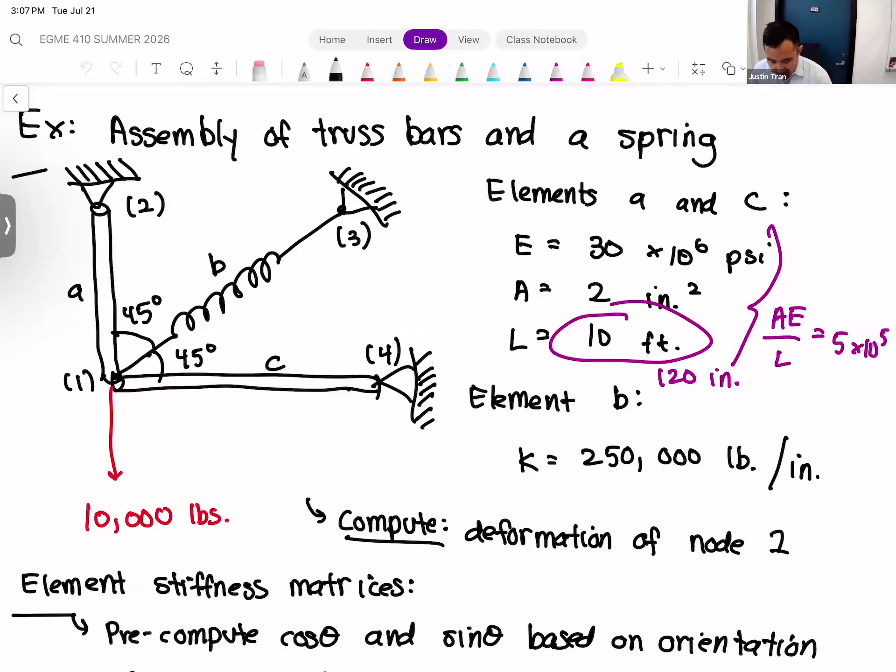So the example that we're working on was this one here. It's a 3-element system. We have 2 truss bars, elements A and C, and a spring, element B. And they're oriented based on the figure that is here.

Where we left off last time was the computation of the element stiffness matrices. Even though doing 2D problems requires more work because there's just larger matrices to compute and more things to plug in, the overall process we follow to do a direct stiffness problem is still the same. We start with the element stiffness matrices, then move on to assembly of the elements into one global linear system, apply the boundary conditions, and then solve from there.

So let's go ahead and pick up where we left off. In fact, we kind of left off at a good spot because we had just finished computing the element stiffness matrices for elements A and B. So let's refresh our memory and compute the element stiffness matrix for element C.

For the element stiffness matrix for a 2D truss, remember it is a 4x4 matrix, and it's given by the following expression. We're going to be computing lots of sines and cosines of the angle on which the element is oriented.

I have it written up here. Let me just write this down. So that's our element stiffness matrix for a truss bar.

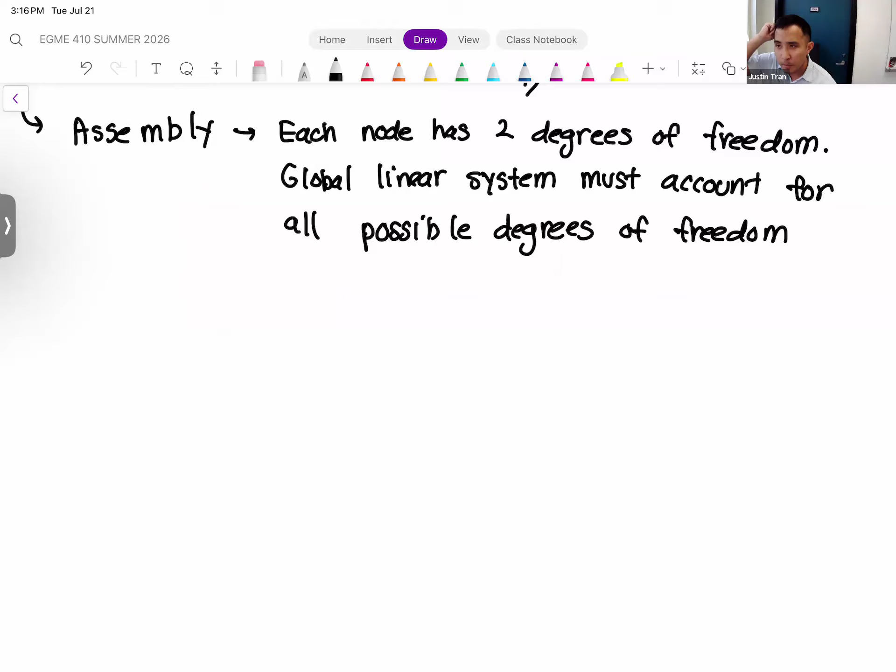Okay, so in this case, for a 2D truss problem with 4 nodes, each node having 2 degrees of freedom, that means our global linear system will have 4 times 2, which is 8 degrees of freedom. So that's 8 rows and 8 columns. Okay, and so you want to make sure you give yourself enough room on the paper to write this. Now, granted, a lot of this global linear system is going to be 0, so don't be intimidated by a large linear system, but we do have to at least have a space for them.

Okay, so let's make a very large matrix here. I'm going to give myself as much room as possible. Okay, and then first let's label the columns just to make sure we have everything. So for every node, I'm going to label a column for the x deformation and the y deformation. Okay. All right, so we have d1x, d1y, d2x, d2y, d3x, d3y, d4x, d4y.

Okay, and then we have to write all of those degrees of freedom into the rows too. Okay, so you have a d1x row, d1y, d2x, d2y, d3x, d3y, d4x, d4y.

Okay, and then one thing we haven't written here yet is the forcing vector, so that's f1x, f1y, f2x, f2y, so on and so forth. But we'll write that after—it's just kind of taking all the room here just to write the matrix.

Right, okay, so just like we did before, we are going to go through each of the elements and write in the entries, or insert the entries of its element stiffness matrix. Okay, so let's start with element A. Element A is connected to nodes 1 and 2.

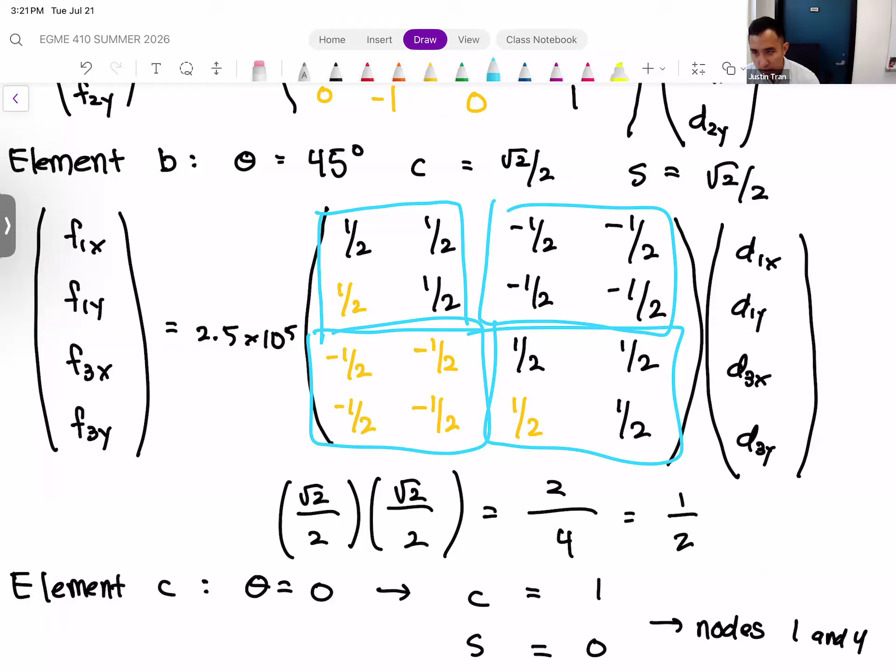So for the upper left quadrant, that goes into the D1X, D1Y entries, and so that's all positive 1/2.

Oh, I'm sorry, before you start writing those in, I always forget this. Remember, we're not just writing in the entries in the middle there, we also have to account for the multiplier in front.

So we can do this in a couple ways. If we want to keep the multiplier in front equal to 5 times 10 to the 5th, we can do that. So basically we're going to say that there is a multiplier in front, going to say in front here is 5 times 10 to the 5th. That way we don't have to rewrite the entries for element A.

But it is going to affect how we write the entries for element B, because element B, if you look at the entry in front, remember element B was associated with the spring. So the spring constant for the spring is different than the value for AE over L for the truss bars. Instead of being 5 times 10 to the 5th, for the spring element B, it's 2.5 times 10 to the 5th, which is 1/2 of that.

And so when we add those entries into the global stiffness matrix, then we have to account for that. Instead of adding 1/2, we're going to add in 0.25, which is 1/4. Okay, so 1/2 divided by 2.

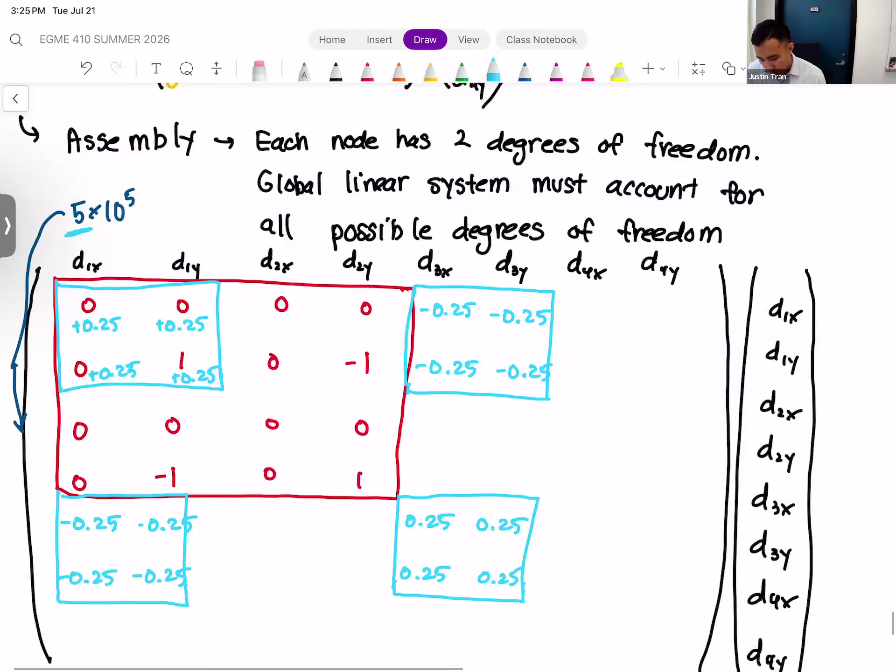Now, the challenge with element B was that the multiplier in front, essentially the spring constant for that spring, was half of the effective spring constant for the truss bars. When we computed AE over L for the truss bars, we got 5 times 10 to the 5th, which was the value we put in front of our global stiffness matrix. But the spring had a spring constant that was only half of that, which is 2.5 times 10 to the 5th, or 250,000 pounds per inch.

So the fact that these are different, one way we can make them the same is we factor out a 2. We factor out a 2 from the interior of the matrix and multiply that by the front, and that gives us 5 times 10 to the 5th. But then that also changes everything in here. If we factor out 2, that means we have to divide everything within the matrix by 2. So instead of 1/2, we have 1/4.

Okay, so hopefully that makes it a bit more clear, because I know I kind of messed that up a little bit. In the notes, what I had in front was just a regular 10 to the 5th, so I basically eliminated that out, and then went from there.

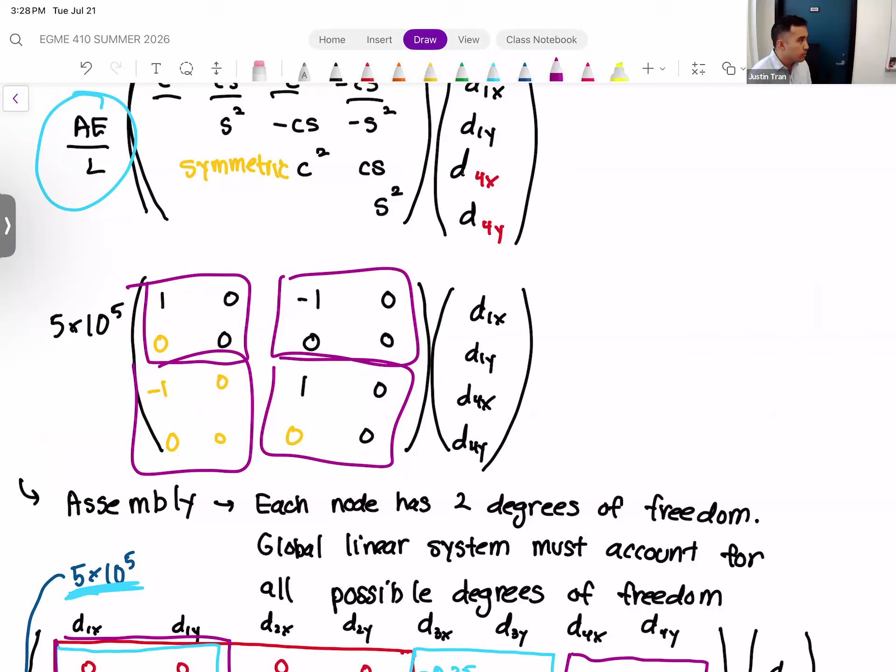Okay, so let's go ahead and add in those entries. Just like before, we're going to take our element stiffness matrix, block them off into 2x2 sections, and then scatter them to the different parts of the global stiffness matrix according to what they are.

All right, so we start with the upper left portion here. We have a +1, and then a +0, +0, +0. Next we have the next portion, which is a -1, 0, 0, 0. And then the bottom left, we have a -1, 0, 0, 0. And then a +1, 0, 0, 0.

And then just like before, everywhere that we haven't boxed yet, we're just going to fill in a 0 into those locations. Okay, just like that, and with that, our assembly is done.

Well, technically, we could simplify this. If we look at the upper left portion there, it's a little bit of a mess because we have a bunch of things added. So let's simplify this just to make it a little bit easier for us.

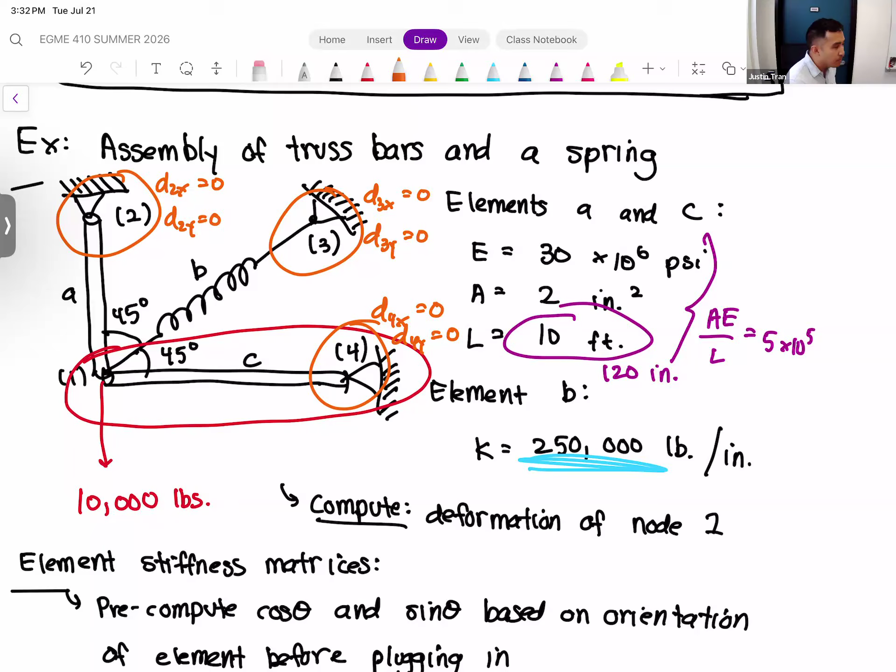So that's quite a lot, right? Basically every row that's associated with nodes 2, 3, and 4, we're essentially going to replace them. And since each of these nodes have 2 degrees of freedom, that means we're going to apply this boundary condition to 6 rows in our global matrix, which is a lot.

Okay, so let's return to our global matrix. We're going to be affecting the rows of d2x, which is this one, d2y, d3x, d3y, d4x, d4y. So all 6 of those rows we're essentially going to replace. Let me clear those out so we can see this a bit better.

Okay, so let's start with the d2x row. Most of it's already in place, right? So we start by replacing the entire row with zeros, which it kind of is already, and then we put a 1 on the diagonal. For d2x, which is the third row in our matrix, that means the 1 is going to go in the third column, the d2x column. Then on the right-hand side, we set f2x equal to 0.

Next we're going to apply that constraint to d2y. We're going to zero out the entire fourth row. This one and this one are going to be zeros, but we need to put a 1 on the diagonal entry, which is going to be the fourth column, right here. And then just like before, we take f2y and set that equal to 0.

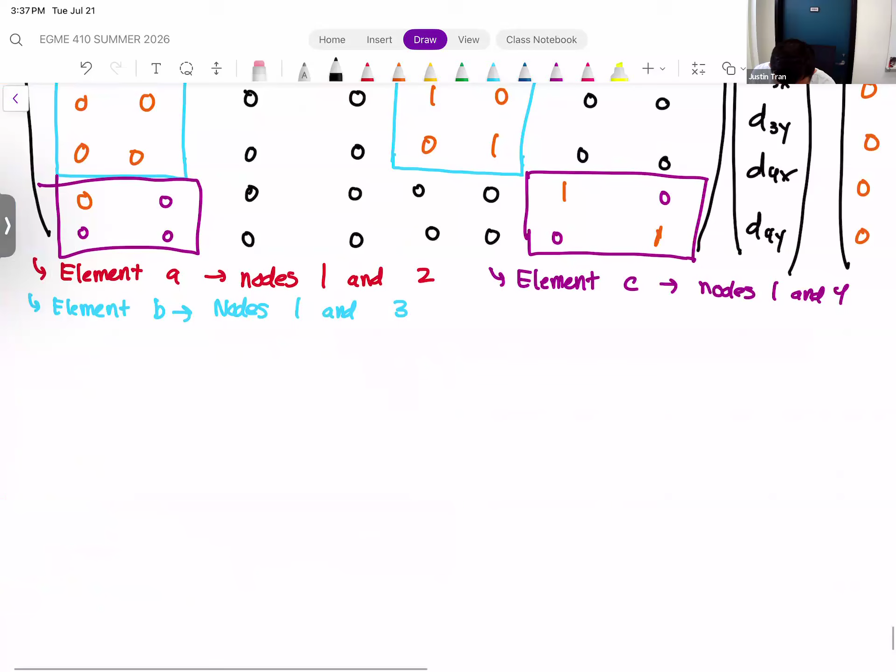Okay, let's go ahead and plug this matrix into MATLAB. And if we do that, what we get is d1x is equal to 0.0033 inches.

d1y is equal to minus 0.0167 inches.

So you can see here that most of the deformation is in the y direction, but because of how the truss structure is designed, there is actually some deformation in the x, even though our load is purely in the y direction, which is very interesting. All the other deformations, d2x, d2y, all the way through to d4y, are all zeros, because of the constraints.

So the only answer here that's kind of remotely interesting is for node 1, because that's the only one that's not constrained.

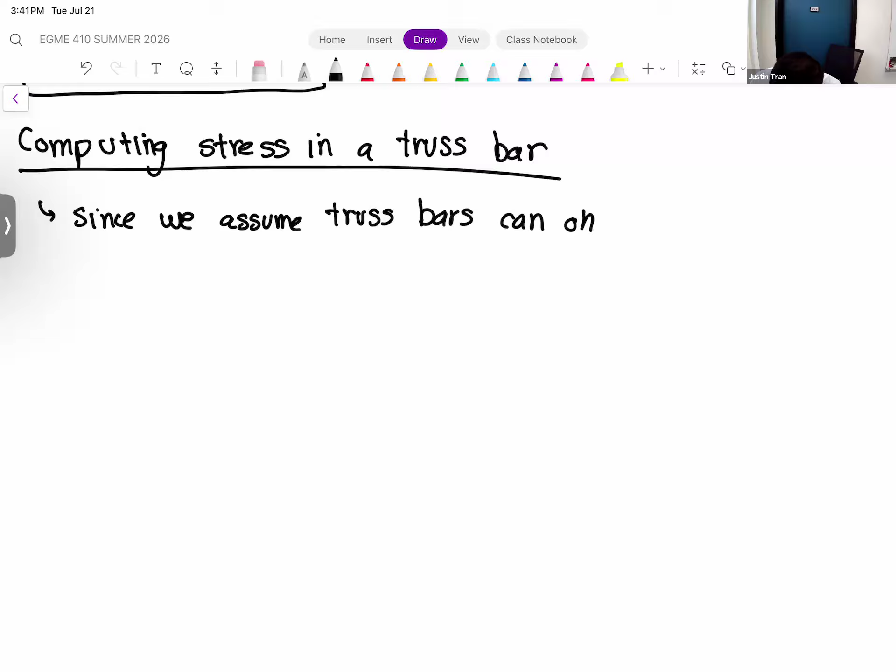So since truss bars can only support tension and compression, that means the mechanical stress that the truss bar experiences is going to be purely normal stress, and there's going to be no shear whatsoever. Because of that, we can compute the stresses straight from the deformation solution.

All right, so basically, in the interest of time, because I want to make sure we do the next example before the break, I'm just going to give you the formula here. But basically, the way that we derive this formula is that we take the nodal forces in the local coordinates, the coordinates that are local to the element, hence the reason why it's a purely normal stress, and we just divide it by the area.

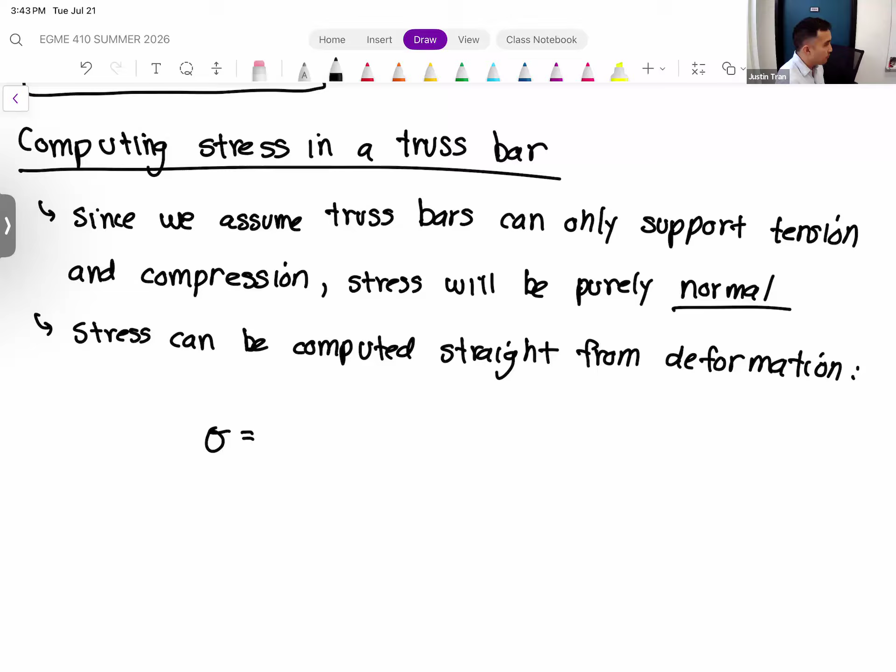So the stress in a truss bar, which again is only computed after you compute the deformation—it's just like in ANSYS, right? In ANSYS, first thing we always compute is the deformation. Then from there, ANSYS computes everything else. So same thing here.

So for a truss bar, we have E, the Young's modulus, divided by L, which is the length, multiplied by this vector. The vector is going to be minus cosine, minus sine, cosine, sine.

So you do need to know the orientation of the element itself. And then you're going to multiply that by a vector of the deformations of that element: d1x, d1y, d2x, d2y. I'm using node 1 and 2 here just as a placeholder, but just know that that vector is the vector of deformations for that element. It doesn't necessarily have to be nodes 1 and 2.

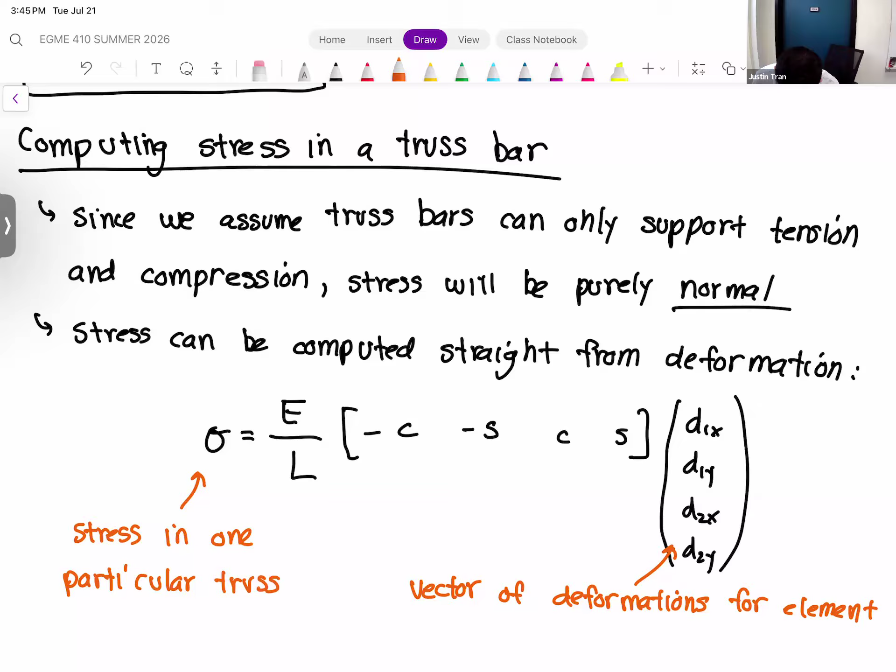And so this sigma here is a stress that you can compute per element. So essentially, you would repeat this calculation for every element or every truss bar that you're interested in finding the stress for.

Okay, so let me demonstrate how to do this just very quickly from the last example.

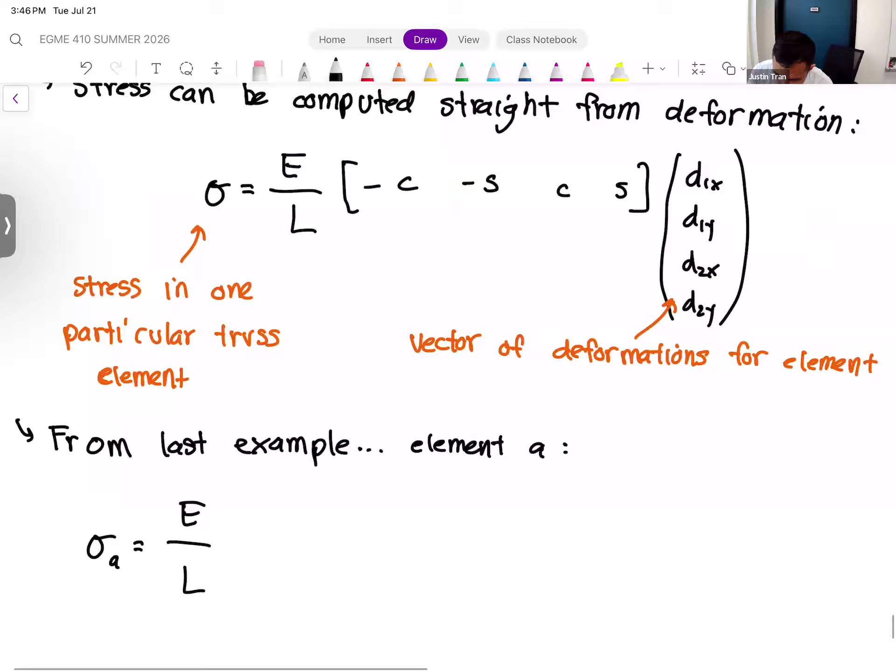So if we plug in the values here, which we've already found from the problem: d1x is 0.0033 inches, d1y is minus 0.0167 inches. And d2x, d2y, since node 2 is fixed, are both zero.

So if we compute this out, we basically do the vector-vector multiplication. Since we're doing a row vector multiplied by a column vector, we have essentially a dot product between these two vectors. The stress in element A is 4,175 PSI, pounds per square inch. One nice thing about this stress calculation, just like in ANSYS, is we can interpret the sign of the stress as either being in tension or compression. The fact that this stress is positive means element A is in tension.

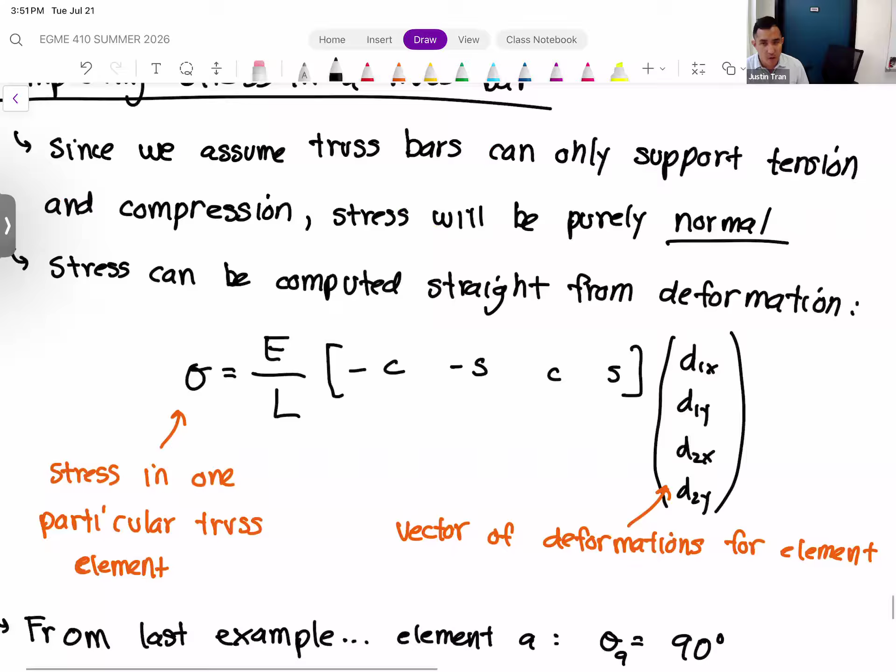Any questions on this before we move on? Okay, so I have one more example for 2D trusses, and this one introduces a new type of constraint. Let's introduce that first, it's pretty straightforward before we do the example. It's probably a constraint you've seen before in your previous classes, hopefully in statics — the concept of a roller constraint.

So with the previous example we did in 2D trusses, we've been introduced to the fact that any given node can have multiple degrees of freedom. What we implicitly assumed in the previous problem was that every fixed support on a 2D truss zeros out both degrees of freedom. We can see that here: nodes 2, 3, and 4, both their x deformation and y deformation are zeroed out. So there are constraints that only constrain one out of two of the degrees of freedom, or maybe one out of more.

So it's possible to have constraints that restrict only one degree of freedom. In fact, we'll take this idea further in the second half of class today when we talk about beams, which introduce another type of degree of freedom called a rotational degree of freedom, which we've already talked about in activity 4. There are different constraints that can constrain maybe only one or two of these degrees of freedom. The first one we're going to introduce is a roller. A roller support looks kind of like a very simplified roller skate. For a roller support, we make the assumption that only the direction perpendicular to the surface is going to be constrained.

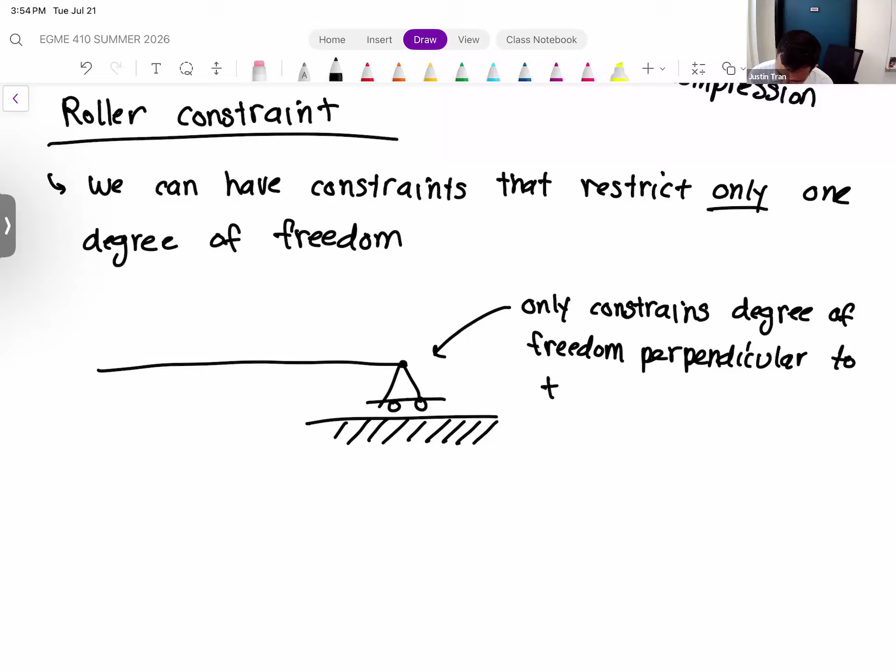So in the direction that's parallel to the roller surface, we leave that alone. So for this figure here, we can see that the dx deformation is going to be free.

Right, because that roller is in the x direction, so our structure is free to roll in that direction. Meanwhile, dy is going to be 0, just constrained. Now, technically, if you put a roller on a surface, it only constrains deformation in one direction. So if you have a roller like this, technically it's only going to stop deformation in the negative y direction. But for the sake of simplicity, we're going to assume that all y deformation is restricted, even in directions that are kind of opposite from the surface.

The way I usually illustrate it is, don't imagine this as just purely a roller. Imagine the roller is inside a track, just like that. So the wheels are free to roll in the x direction, but any movement or attempted movement in the y direction, the constraint is going to prevent. That gives us a little bit of flexibility in terms of how we do our problems. So sometimes a roller support is more appropriate for a given situation.

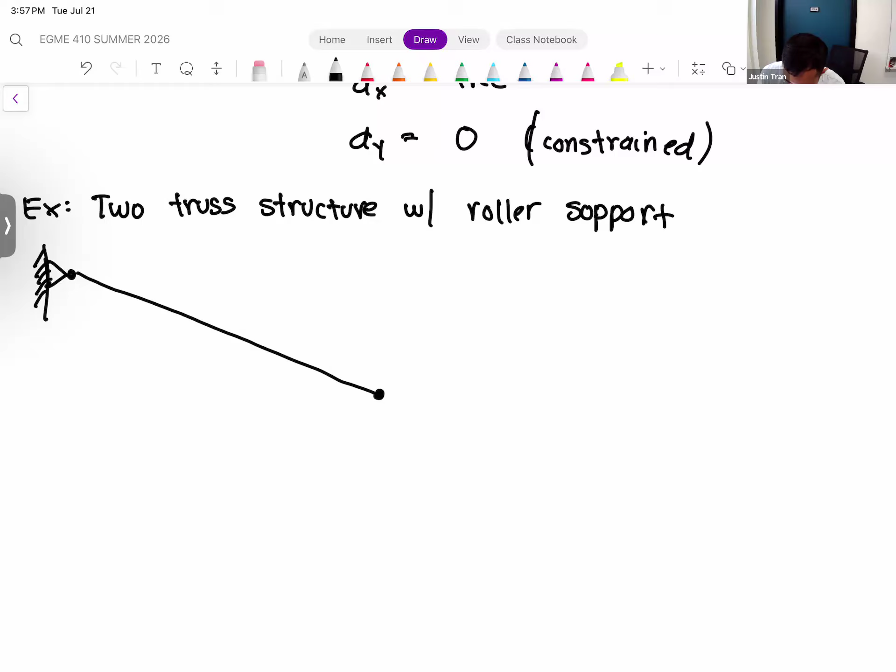So let's have a two truss structure with a roller support. It's going to be a structure that is attached to a wall. We're going to have one element here that is slanted downwards, we'll call this element A. And another element here that's purely horizontal, we'll call this element B. Element B is going to be connected to a roller.

So let's go ahead and label the nodes. We're going to call node 1 here at the end. The other node that's connected to element A is going to be node 2. And then the roller support is going to be at node 3.

We have some dimensions here as well. We're going to assume that the length of element B is 5 feet, and the length of element A is 10 feet.

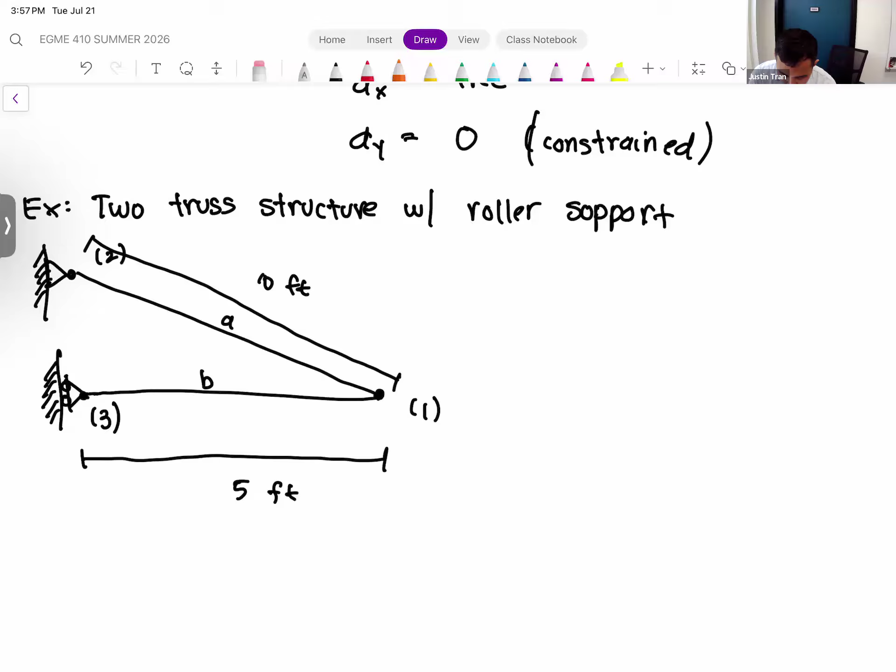In terms of load, we have a single load here, kind of flying off or holding on the end. So it's a load in the negative y direction on node 1, with a magnitude of 25,000 pounds.

Let's also talk about the truss properties. Both of them are made of the same material, so both have a Young's modulus of 30 times 10 to the 6 psi. And we're going to assume that both have the same cross-sectional area, which is 1 inch squared.

So for this system here, we're going to do basically our standard calculation. We're interested in computing the deformations of all nodes in the system.

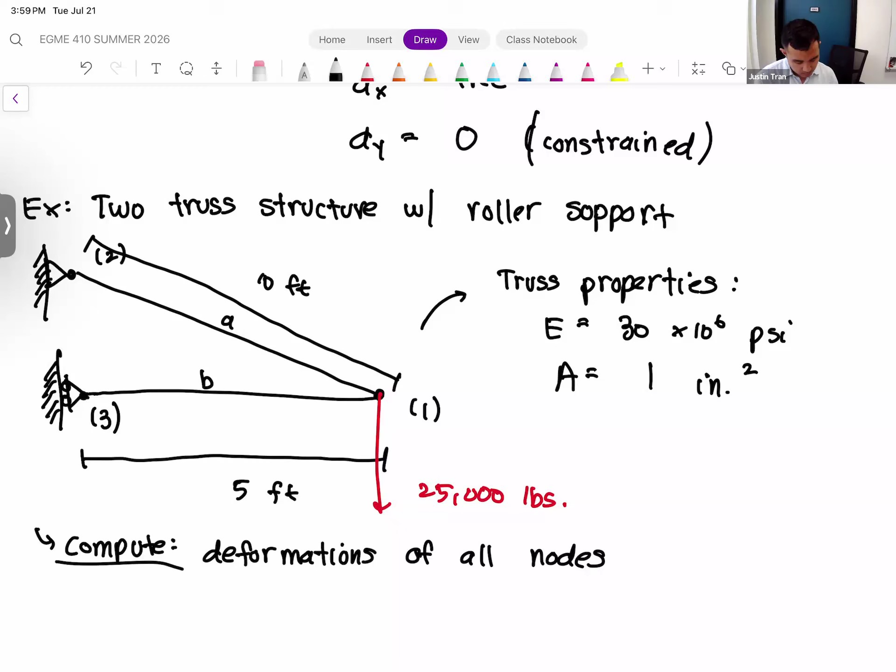All right, so we have a pretty standard problem here. The only wrinkle here is that we have a roller support at node 3, so that's going to affect how we apply the boundary conditions near the end. But it starts in a very standard way, so let's go ahead and start with the element stiffness matrix.

Oh, I'm sorry, I forgot one piece of information on the problem. We need to know the orientation of element A. We can tell from the image that element B is horizontal, but to get the orientation for element A, we need that angle there. We're going to assume that angle is 30 degrees. This is our first time with what I'd consider a fairly awkward angle. Anything that's not 0, 90, or 45 degrees is a little bit awkward, so our sines and cosines, our matrix here, is going to be a bit strange. Just be prepared for that.

Okay, so let's start with the element stiffness matrices.

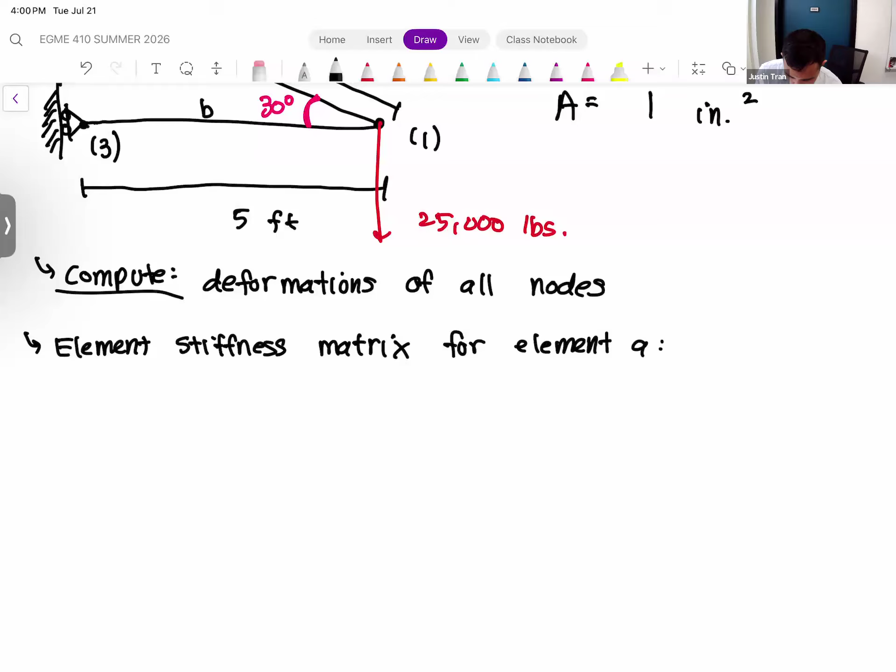Okay, so let's start with element A. So we know it's going to be, we do have a weird angle here of 30 degrees. So the first thing we need to determine is what its orientation angle is, because that's going to affect how we compute the sines and cosines.

So from the image, it's very tempting to set the orientation angle for A to be 30 degrees, because that's the angle that's given to us. But that's actually not the angle that you should plug in to sine and cosine. Let me explain why.

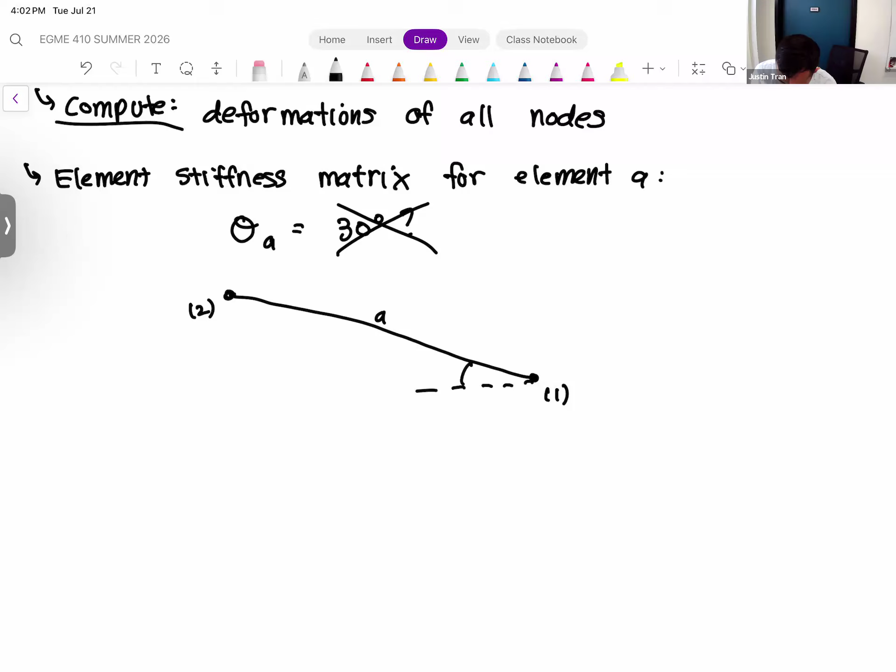If you look at how element A is oriented, let me go ahead and draw it here by itself. So this here is element A. We have node 1 here on the left, node 2 here, or node 1 on the right, node 2 on the left. And this angle here is 30 degrees. So the acute angle that element A makes with the horizontal is 30 degrees.

But what I'm saying here, or what I'm claiming, is that that's not the angle that you should plug in to your Truss element stiffness matrix equation, right? And why is that? That's the only angle that's given here, right? Well...

What I didn't mention last time, just because it wasn't an issue with the past example, is that there is a certain convention that we need to follow when computing these orientation angles. In some sense, it doesn't matter what convention you use. The only thing that matters is that it's consistent. So I'm going to give you my convention, just so your answers are consistent with mine. But if you prefer to do this slightly differently, that's fine. You're still going to get the same answers in the end, granted that you use the same convention for every single element.

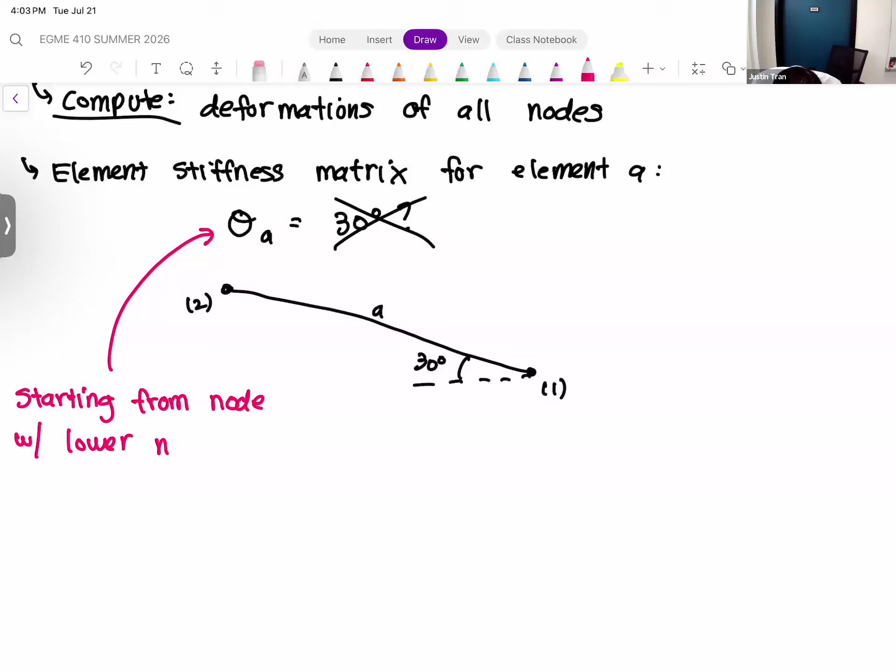Here's the convention I use: I start from the node on the element that has the lower node number. So you're going to look at your element, right? It's going to be connected to two nodes. You're going to look at the one that has the lower node number index, which in this case is node 1. So this node, you can imagine that as your pivot.

All right, so that's the pivot. That's where you're rotating around. Now, what you need to imagine is that the element with that as the pivot is oriented at 3 o'clock, so it's going to be pointing in the positive x direction.

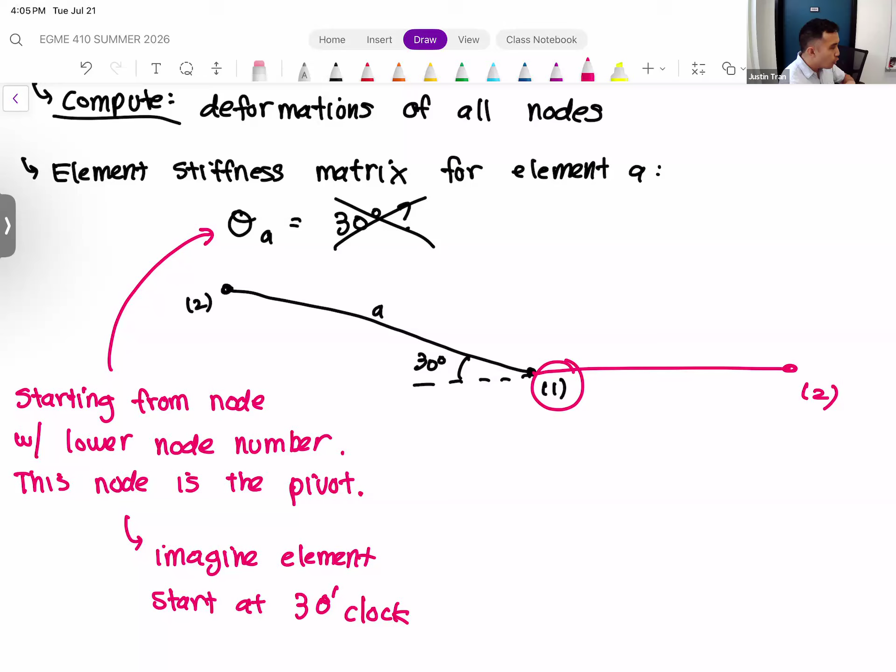And so essentially, we're going to imagine that our element starts like this. Using the lower number node as a pivot, imagine that our hand or our element kind of pushes out in the positive x direction. Right, so that's where we start. Now, that's not the orientation of the element itself, but in order to get the element into its orientation, we're going to rotate counterclockwise until we reach the orientation of the element that's given to us in the figure.

So from that starting position of 3 o'clock, we're going to go essentially backwards in time, you can think of it like that, until we reach the orientation that's given to us. So essentially, we're going to start here and then rotate along that pink arc just like that. All right, so the amount that we rotate counterclockwise, that's the orientation angle that we plug in.

So you're going to have to use a little bit of trig here, a little bit of geometry in order to get this answer. But you can see from this image here where if the given angle is 30 degrees, and that's with respect to a horizontal axis in the negative x direction, that means our orientation angle, in order to get from 3 o'clock to our given orientation, has to be 150 degrees. And so that is the angle that we plug into our element stiffness matrix.

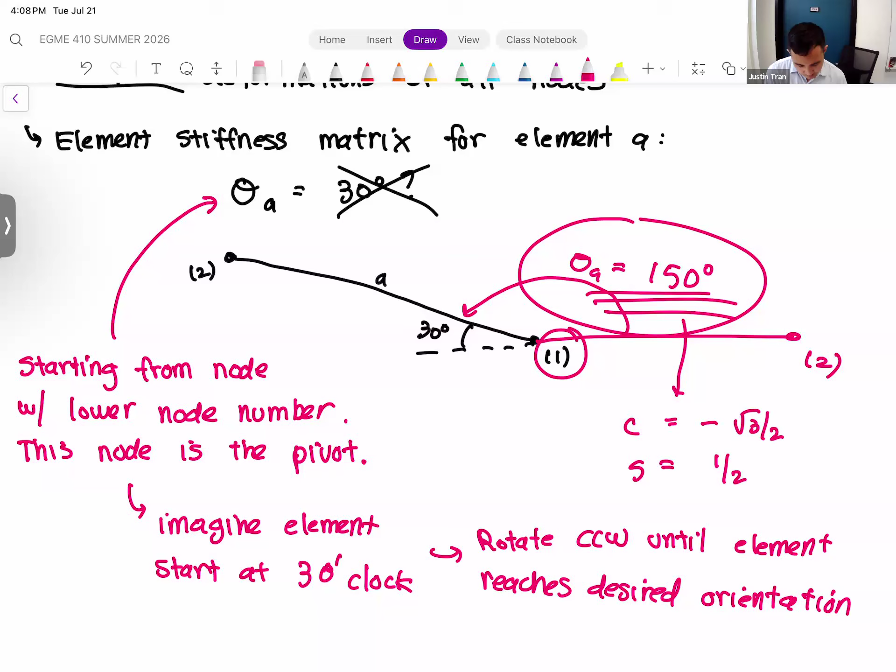So let's go ahead and plug in and compute the element stiffness matrix for element A. Unfortunately there's no nice way to do this—you're going to be multiplying a lot of root 3's over 2's times 1/2.

We also need to compute AE over L. For this element, AE over L is 2.5 times 10 to the 5th. So that means our element stiffness matrix is 2.5 times 10 to the 5th divided by...

I'm just going to write the values in here, but feel free to check this on your own as well: 3/4, minus root 3 over 4, minus 3/4, root 3 over 4. And then we're going to multiply this by the degrees of freedom in element A, which is d1x, d1y, d2x, d2y, because element A is connected to nodes 1 and 2.

Right, and then just like we always do, let's go ahead and write them into the column. So everything in that first row, we're going to basically transpose into the first column, just like we normally do.

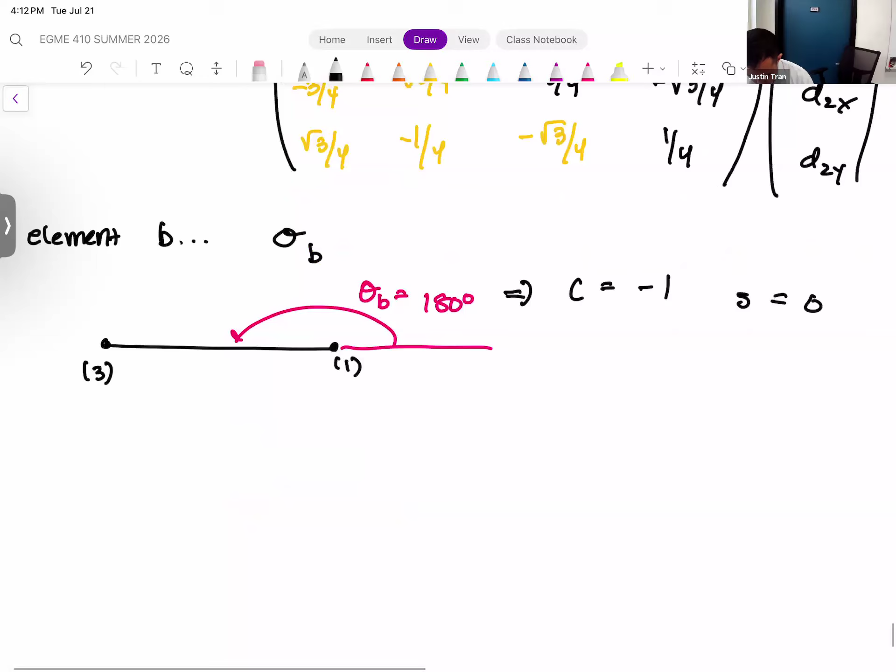Now we're going to multiply this by the degrees of freedom for element B, which is d1x, d1y, d3x, d3y. And then the stiffness constant out in front—since element B has a shorter length, the stiffness constant is also going to be larger because we're dividing by the length. It's 5 times 10 to the 5th.

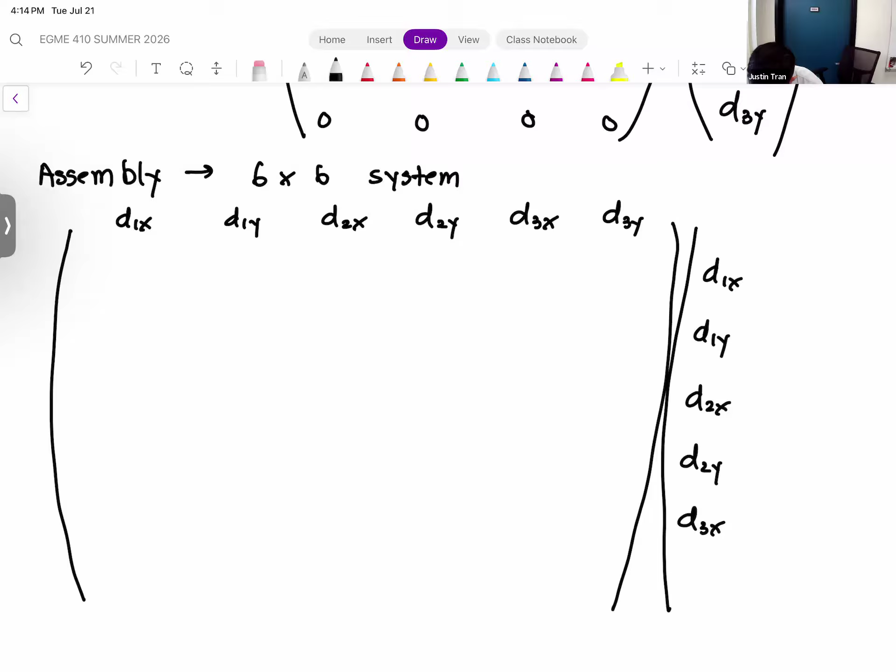Let's go ahead and write in the forcing vector as well.

Okay, so let's go ahead and box out the element stiffness matrices. First we have element A. Element A is connected to nodes 1 and 2, so those are two nodes that are right next to each other in the system. So we're going to block out a continuous 4x4 block here, which looks just like that.

And then element B is going to be nodes 1 and 3. So it's going to be these regions right here, this one right here, and this one right here. Okay, and we're going to have zeros everywhere else.

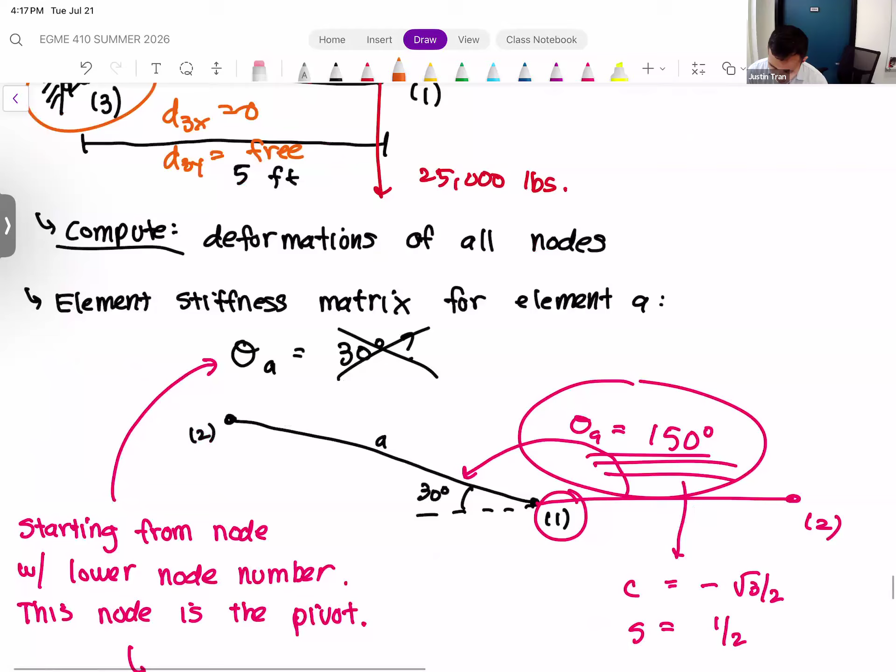Okay, so let's go ahead and do just that. For the d2x row, that is the third row in the matrix, so we're going to have zeros here, 1, 0, just like that: 0, 0, 0, 1, 0, 0. So rows 3 and 4 in the matrix look just like that.

And just like we always do with our constraints, we're going to replace the entry in the forcing vector. So f2x and f2y are going to be 0 as well. We're going to do the exact same thing for d3x, so f3x here is going to be 0.

And then just like the previous example, we just have one load. Our load in this case is 25,000 pounds, which is being applied in the y direction on node 1. So that means F1y is going to be minus 25,000 and F1x is going to be 0.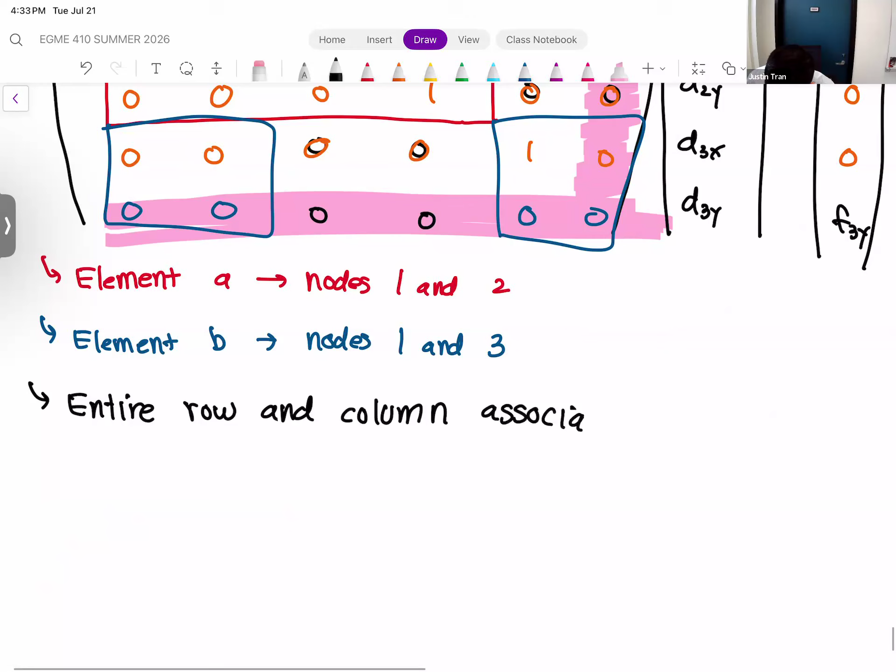Now, this doesn't necessarily have to do with the fact that we have a roller here - it's kind of just coincidence. This can happen even if you don't have a roller support, although for this particular problem, it happens in the case where you have a roller support.

So the fact that it happened on a roller here was just coincidence, but this shows one very distinct thing. If you try to solve this matrix as it is - assuming you input the entries for element A - and try to invert the matrix in MATLAB, MATLAB will tell you that this matrix system is impossible to solve. You'll get an error, or you might get NaNs, not-a-numbers. The reason is because if you have an entire row and an entire column of zeros that correspond to the same degree of freedom, that tells you this system is under-constrained.

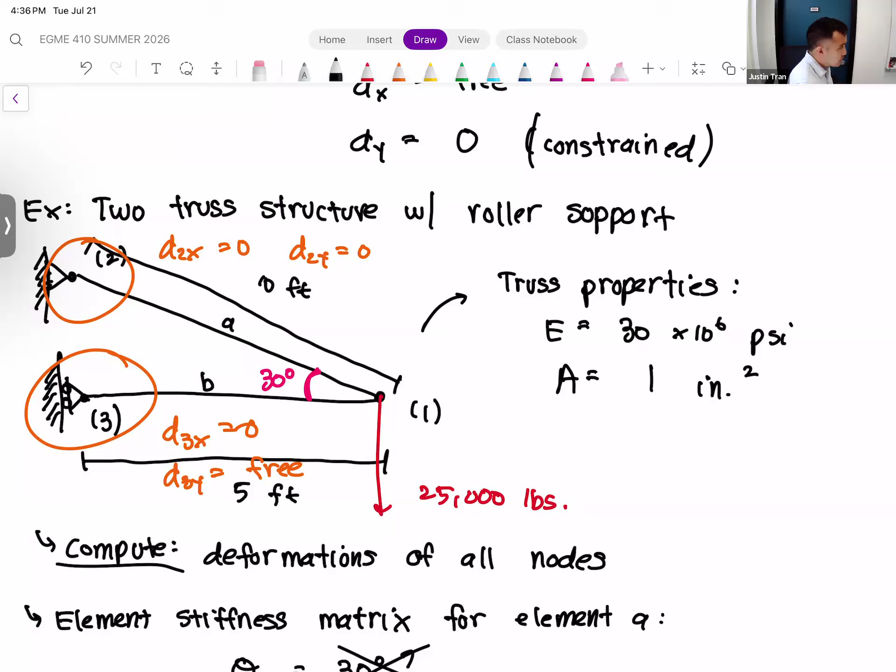And it makes sense if you look at the way the system is designed. We're pulling downward with a force of 25,000 pounds. Node two is fine, it's kind of fixed to that location. But if you look at node three - if we pull down on this system, and node three has a roller support there, what do we expect to happen? We expect that roller is actually going to fall downwards as well. So we don't have a static situation anymore, we have a dynamic situation - this system is going to move. There's going to be some rigid body motion that happens.

So what happens when you find an under constrained system? Well, one thing you can do is just throw up your hands and say this problem sucks, right? This problem was not meant to be solved this way, which is true. So that's one way to look at it.

This is important for you to know for ANSYS problems as well, because this can happen in ANSYS too. Even if you think you fully constrained the system, you may have an under constrained system, and some of you have actually experienced this error.

Some of this may have happened for some of you in ANSYS activity 2, for some of you in activity 3, and it may happen to some of you in activity 4. So ANSYS has a very particular error called a solver pivot warning.

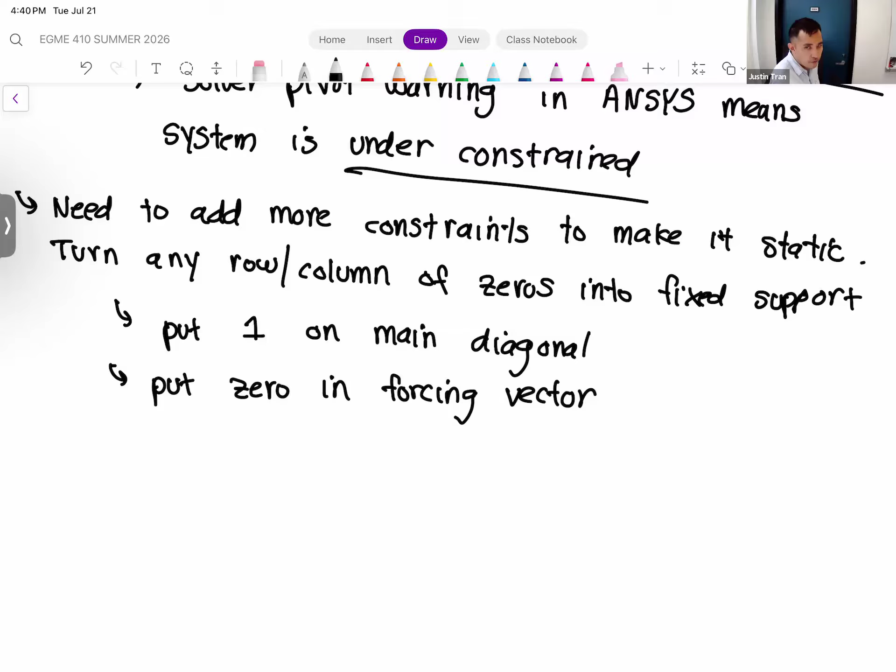You essentially modify the problem so that you can actually solve it and find a solution in the original configuration.

So for this problem, our only issue here is with D3Y. What we're going to do is eliminate this entry here, and we're going to put a 1 here. This 1 will constrain D3Y. And then we also need to put a 0 in for F3Y as well.

So essentially what we're doing in this problem is transforming that roller support into a pin support or a fixed support. That's something you would need to do to solve that kind of problem. Now in ANSYS, when you get that solver pivot warning, that means you need to add more fixed supports.

Sometimes it's just that you forgot to provide a fixed support in a particular problem. That's kind of uncommon though, because applying a fixed support kind of comes second nature. What's actually a more common cause for the solver pivot warning in ANSYS is that you have different parts in an assembly that aren't fully constrained with each other.

So if you get the solver pivot warning in ANSYS and you're sure you have a fixed support in your model, I would check the connections between different parts and make sure that whichever parts are supposed to be bonded are bonded together.

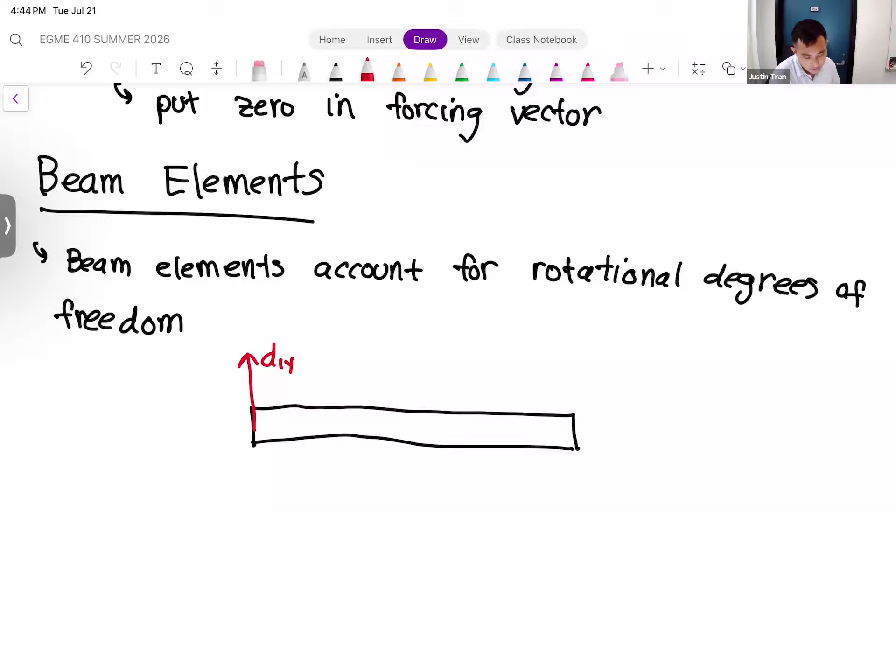And then we're also going to account for or compute the rotational degree of freedom, theta 1. And then same thing on the other side as well.

So for beams, unlike trusses, remember trusses and springs can only support what we call axial deformation, that's tension and compression. So beams have the other degrees of freedom, which are rotation and transverse deformation.

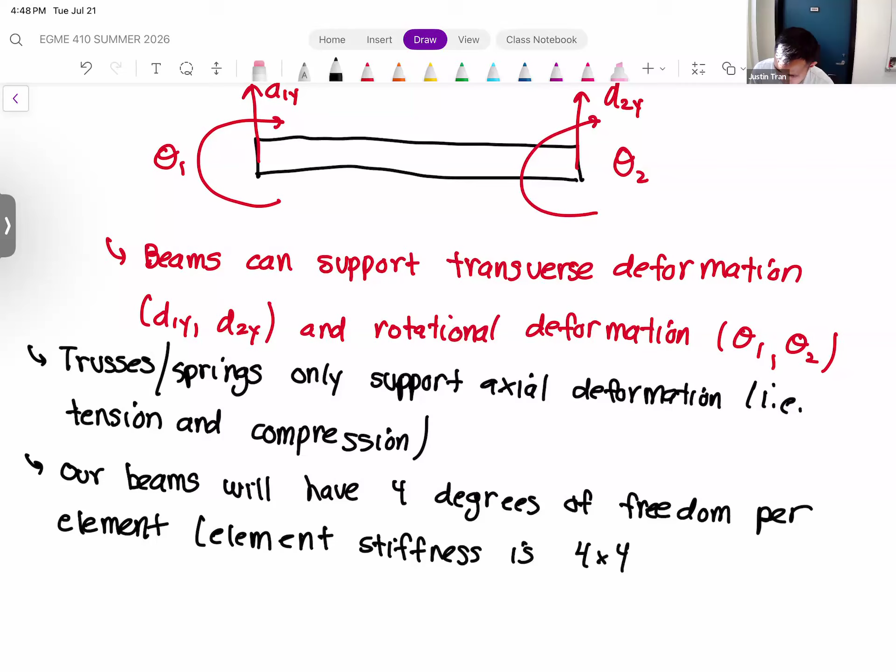So that means our element stiffness matrix will be 4 by 4. And a 4 by 4 element stiffness matrix will only have 16 entries for us to compute, just like the 2D truss. And also, just like the 2D truss element, there is symmetry here as well, so you can definitely leverage that symmetry when computing these matrices. So 16 entries, much better than 36.

All right, and so with beam elements here, there is theory that governs beams. There is the whole idea of a beam equation that's derived from the concepts of Euler and Bernoulli. Euler-Bernoulli beam theory is probably something you've learned in your solid mechanics class. We're not going to go through the derivation because I think there's enough for us to go over with the direct stiffness problems, so I'm just going to give you the element stiffness matrix, and then explain all the different variables that go into it.

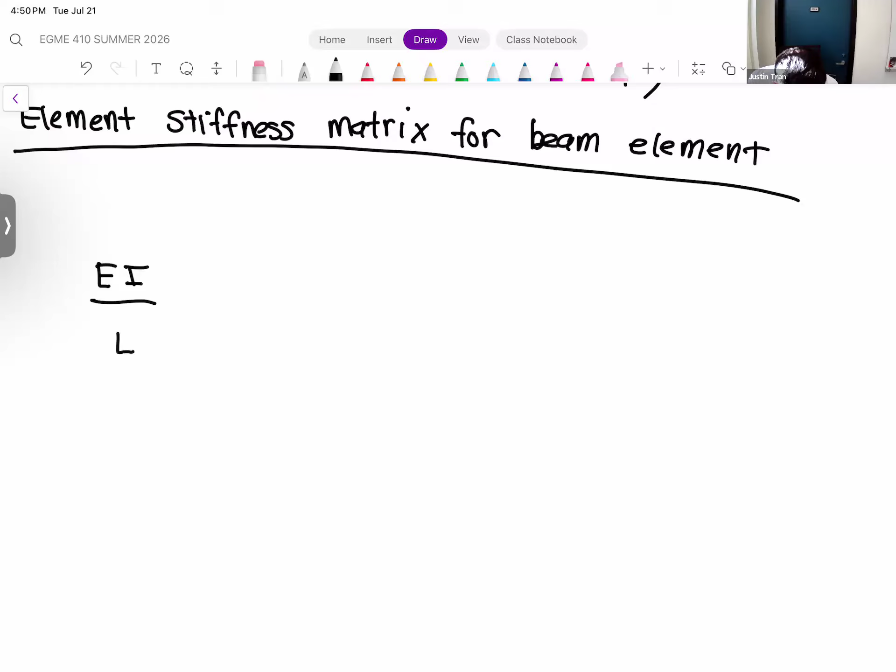All right, so this one's going to look a little bit strange because we're going to have rows and columns that correspond to the angular deformation, rotational deformation. Okay, so for the element stiffness matrix, we have the following: first we have our factor out in front, so we have EI divided by L cubed. We'll define all of those in a second.

And then we have a 4 by 4 matrix where we have our four nodal degrees of freedom. So just like we had in the figure up here, our 4 degrees of freedom are d1y, theta 1, d2y, theta 2. So we have a transverse deformation and a rotational deformation as well.

Okay, and so the entries in the matrix are the following. So first row is going to be 12, 6L, minus 12, and then 6L.

And just like our 2D truss, our matrix here is symmetric, so that means we can take the entries in the first row and transpose it down into the first column. So this one's going to go here, this one's going to go here, this one's going to go here: 6L, minus 12, 6L.

I'm really emphasizing that trick with the symmetric matrix because it really does save you a lot of time. What you're going to find, especially when you start doing the homework, is you're going to be spending a lot of time computing these individual entries in these matrices. So anything you can do to leverage the symmetry in these matrices will help you in the long run. It may not seem like much per problem, but when you're doing this over and over again, all those little time savings add up.

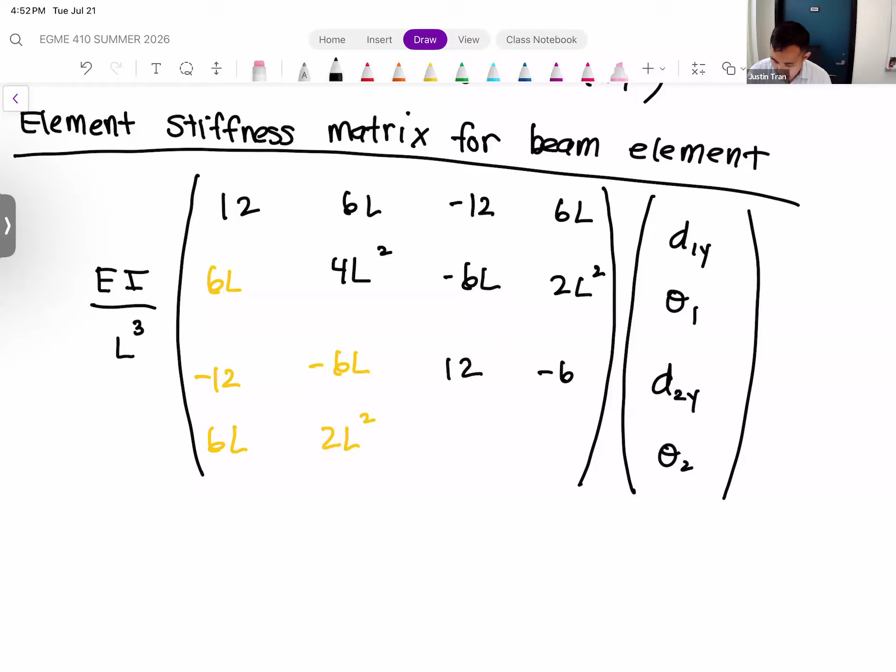Second row: we start on the diagonal entry, which is 4L squared, and then minus 6L, 2L squared. Once again, we write this entry into the column, so we have a minus 6L and a 2L squared. Next row in the matrix, we have a 12 and then a minus 6L. That minus 6L is going to be transposed down into the last row. And then finally, our last entry is 4L squared.

So that right there is the element stiffness matrix for a beam element. Everything in yellow there is symmetric with something that is above the main diagonal.

All right, let's go ahead and define all of the variables here, because there's a lot of symbols. First we have E. E here has the same definition as our truss bars, so E here is the Young's modulus for the beam.

That depends on the material. That's almost always given to you. Next, let's go with L, because L also is a familiar friend. So L here is the length of the beam element along the axis of the beam.

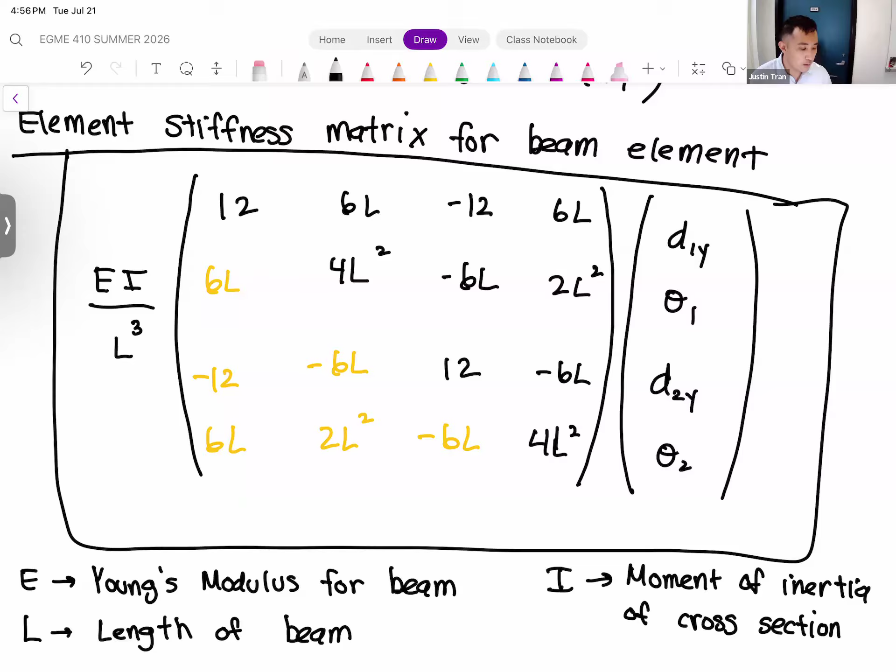And of course, D1y, D2y, that is the transverse deformations, and then theta 1, theta 2, those are the rotational deformations — already defined as well. All right, so that's the element stiffness matrix for the beam element. Again, we're skipping the derivation here, but just know that this element stiffness matrix was derived based on beam theory. Any questions on the element stiffness matrix for the beam?

Okay, cool. All right, so next thing I want to introduce is let's bring back the concept of the constraints. Now that we have a rotational degree of freedom, theta 1, theta 2, we need to revise our constraints because we need to know which constraints are actually restrictive of the angular deformation versus just the translational deformations.

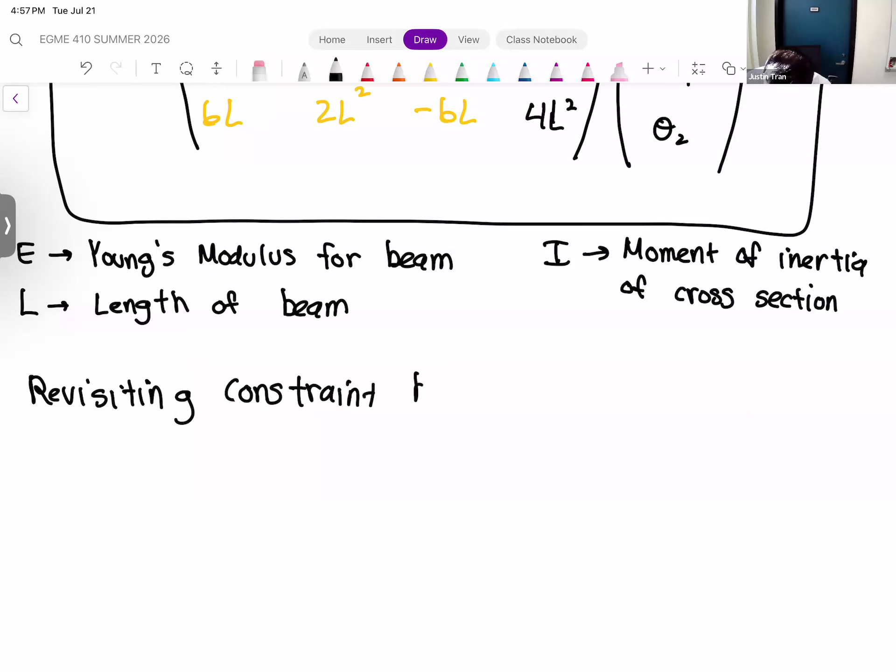Okay, so just a little bit of terminology. Axial deformations, which is tension and compression, and the transverse deformations that we just talked about, I would consider those to be the translational degrees of freedom. Whereas theta 1, theta 2, those are the rotational degrees of freedom.

So different constraints are going to affect these degrees of freedom differently. For the problems we're doing in this class, there are 3 different types of constraints that you need to know how they affect our system. The first one, and I admit I've been abusing this term, is what's known as a fixed support or fixed constraint.

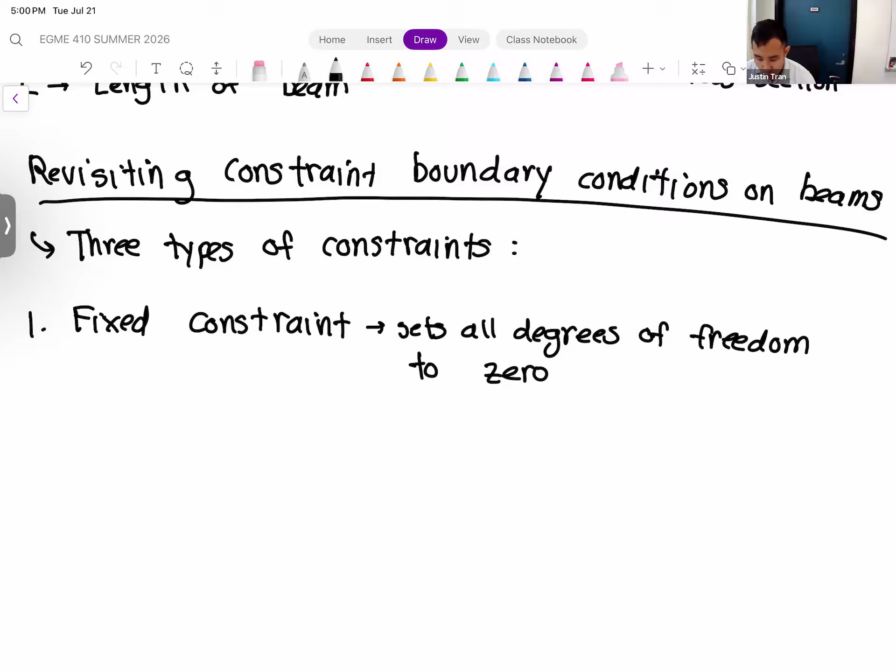Now, the way that fixed constraints are typically shown is it kind of looks like the beam is stuck into the wall, or kind of welded into the wall. So it usually looks something like this. You have your beam, and a fixed support looks like it's just kind of glued to a wall, just like this.

So let's say you have a wall there. Whenever you have a wall, we can assume that the wall has 0 deformation. And so if you have a beam that's just attached to it, that is what your fixed support will look like.

And so, just like the description says, all degrees of freedom are knocked out at a fixed support. So that means dx is equal to dy is equal to theta is equal to 0 — all degrees of freedom.

Next, we have the concept of a pin support or pin constraint. A pin constraint will only restrict the translational degrees of freedom, so dx and dy, but it will leave the rotational degree of freedom free in order to do what it has to do.

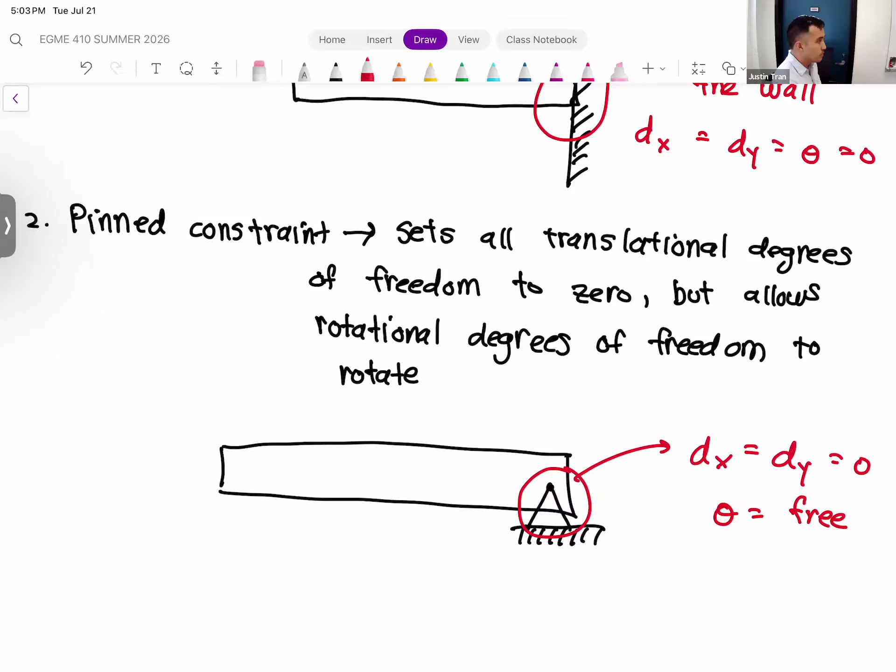So for a support like this, dx is equal to dy is equal to 0. The translational degrees of freedom are constrained, but the angular degree of freedom is not — so theta here is free. If you saw a pin support in a system, you do not zero out the row associated with theta.

And then the last degree of freedom that we have is the roller support, which we had just finished talking about. But it's worth mentioning here that the roller support also does not constrain the rotational degrees of freedom.

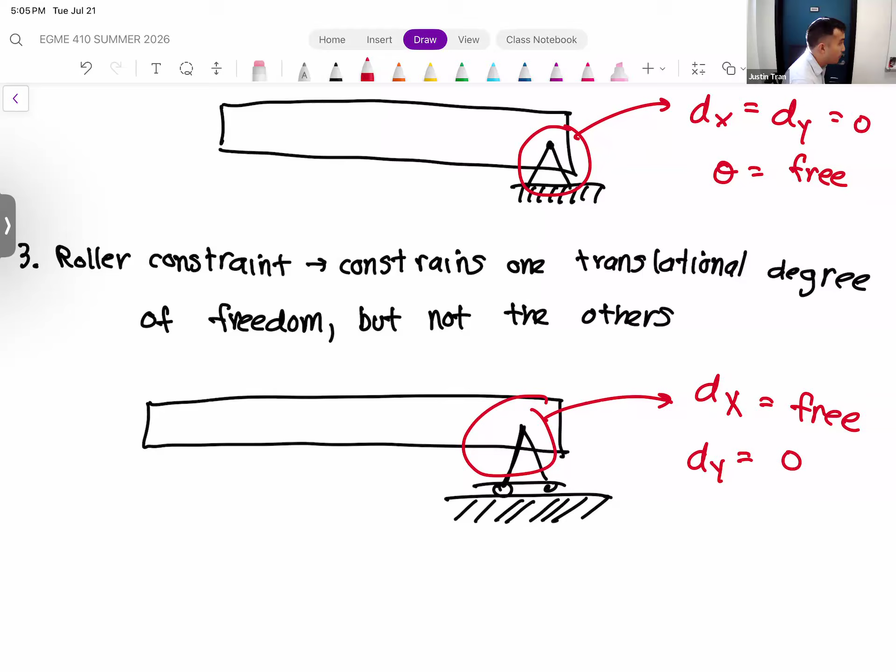So for this configuration, we can see here that dx is free, just because the x direction is the direction that's parallel to the roller surface. dy is going to be constrained, because the y direction is perpendicular to the roller surface. And then the theta, the rotational degree of freedom, also is free.

So for beam problems, you have to be a little more careful with the constraints because there is a difference. The main thing that's going to trip you up is the difference between a fixed constraint, where all degrees of freedom are set to 0, versus the pin constraint, where theta is still free. So you need to make sure that when you apply your boundary conditions, you account for that nuance.

Any questions on the types of constraints that we can have in our beam problems?

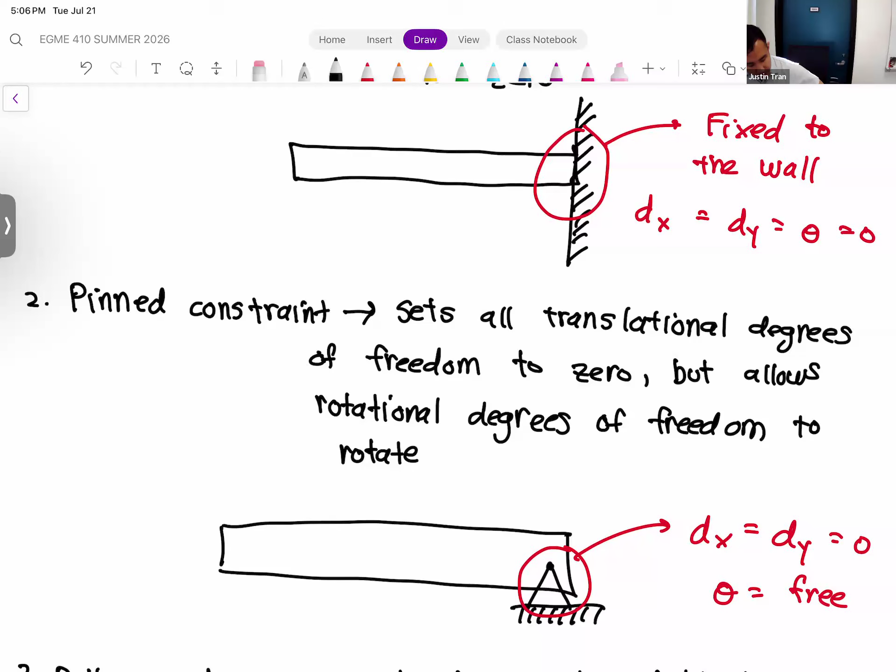Okay, all right, so let's do an example. This example here is pretty straightforward — in fact, there's no numbers. But I do like to go over it just because it's a good illustration on how to deal with the different constraints.

Okay, so let's look at a very simple two-beam system. We have one beam. This first beam here is going to be fixed to a wall.

And that's going to be attached to another beam, just like that. So the first beam here is going to be beam A. The second beam is going to be element B.

We have our nodes in the system, so we have node 1 that's attached to the wall, node 2, which is right in between elements A and B, and node 3, which is at the end. Node 3 here is actually going to be constrained as well, but it's going to be constrained with a pin.

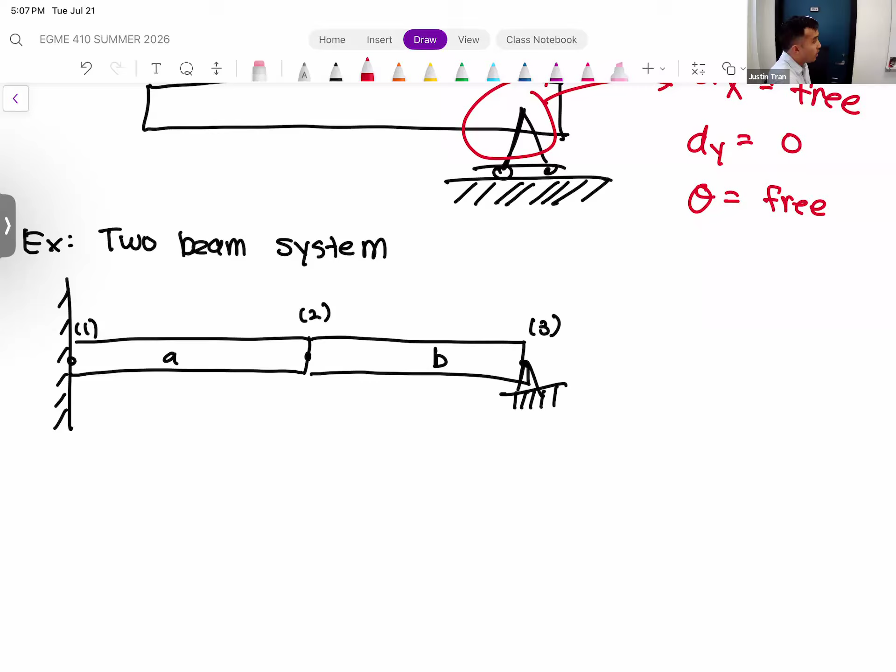Another thing we will apply here: the fact that we have multiple degrees of freedom at each node means we can apply loadings in each of those degrees of freedom as well. So we're not limited to just one load per node; we can have multiple loads per node.

For instance, on node 2, we can have a transverse force P going in the negative y direction, and we can apply a torque as well. Let's say at node 2 we're also applying a torque of magnitude M.

Sometimes torques are called moments. I try to keep it consistent, so that's why we give it the symbol capital M. M stands for moment. So we can apply a torque or moment directly on the node, which we can do now because we actually have a rotational degree of freedom that's going to support that.

And so for this particular problem, both elements are identical. We're going to have the exact same values of the Young's modulus, exact same length, and exact same moment of inertia. So what we want to do here is simply write out the global stiffness matrix along with all of the loads and constraints.

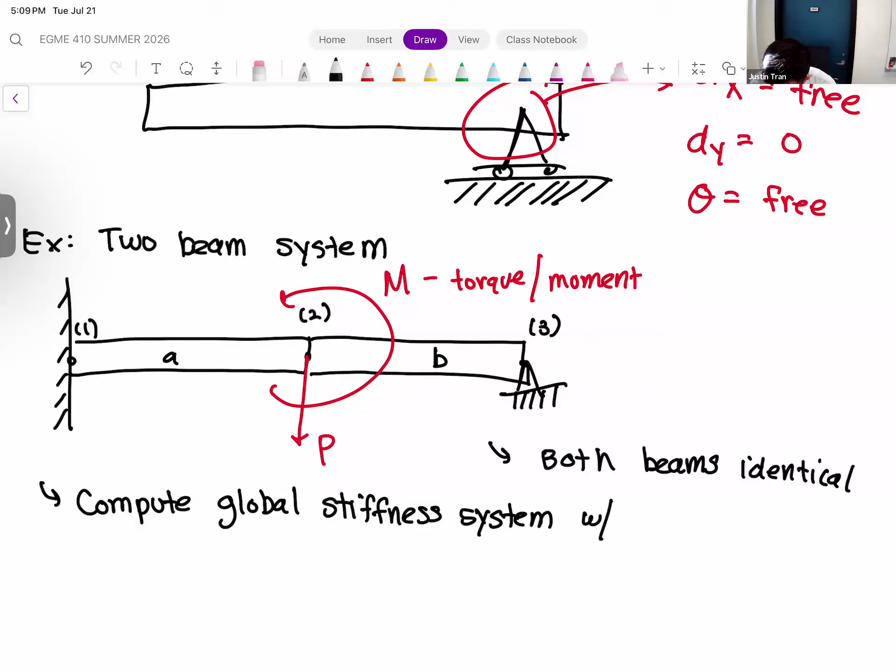Okay, so again, no numbers here. This is just a very simple symbolic problem. And since both elements here are identical, there's really no point in writing out the element stiffness matrices separately, but we'll go ahead and do it just once, just so you can see.

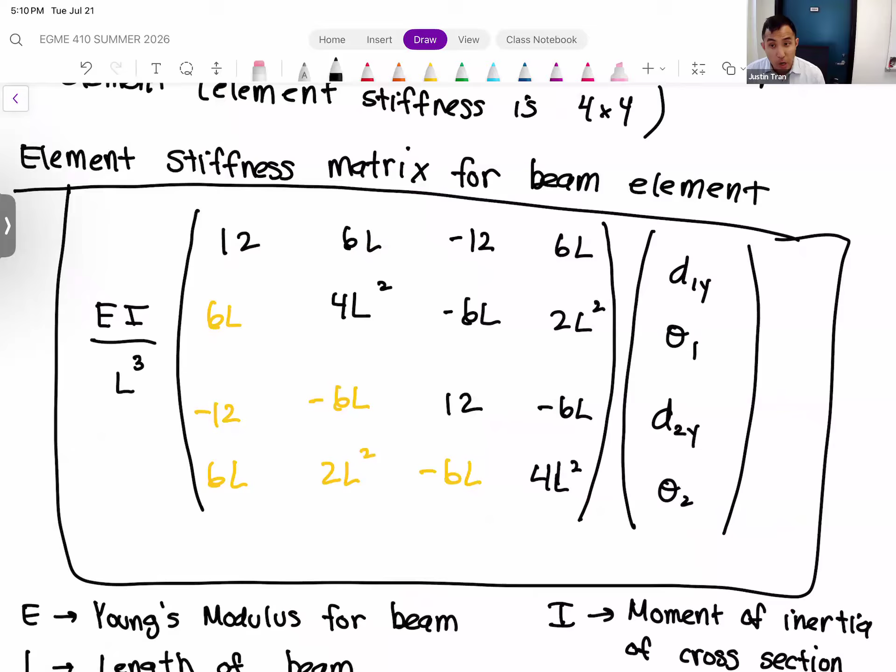So the element stiffness matrix is just going to look like this. Without any numbers to plug in, we can just have the symbols for the element stiffness matrices for both elements.

We have E times I divided by L cubed, multiplied by 12, 6L, minus 12, 6L; 6L, minus 12, 6L; 4L squared, minus 6L, 2L squared. We utilize the symmetry to write that down into the column, and then we finish writing up the element stiffness matrix just like that.

Now, of course, the two elements are connected to different nodes, and we do have to account for that. But in terms of the values of the element stiffness matrix, especially when we don't have values to plug in, they're just going to have this kind of form.

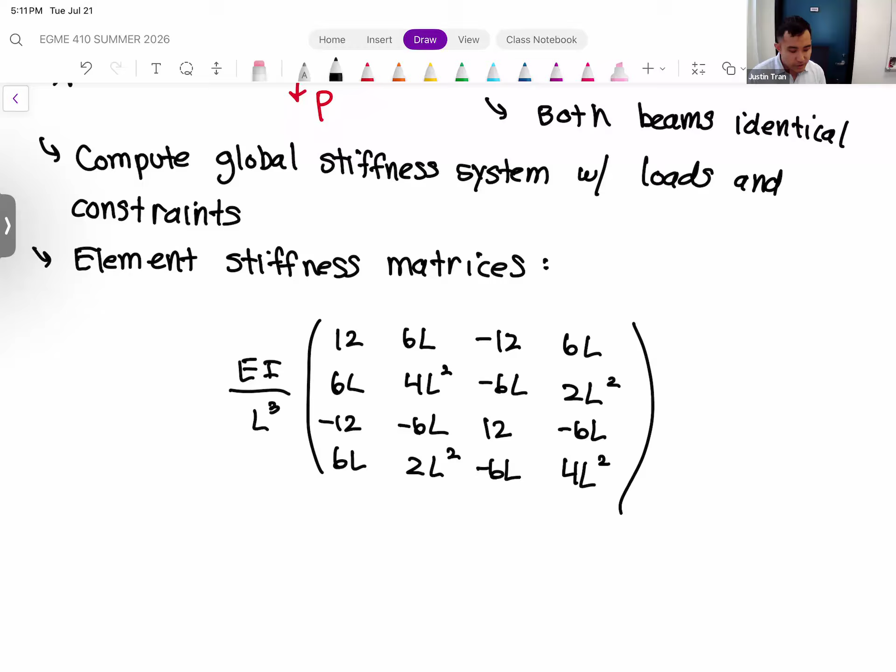Okay, so let's go ahead and move on to what this problem was more about, which is the assembly.

So for assembly, we have our global stiffness matrix. In this case, we have 3 nodes: nodes 1, 2, and 3. Each of them are going to have 2 degrees of freedom, transverse deformation as well as a rotational deformation. So that means our global stiffness matrix here is going to be 6 by 6.

Okay, so let's go ahead and write that in here. So we have D1Y, theta 1, D2Y, theta 2, D3Y, theta 3 across the columns.

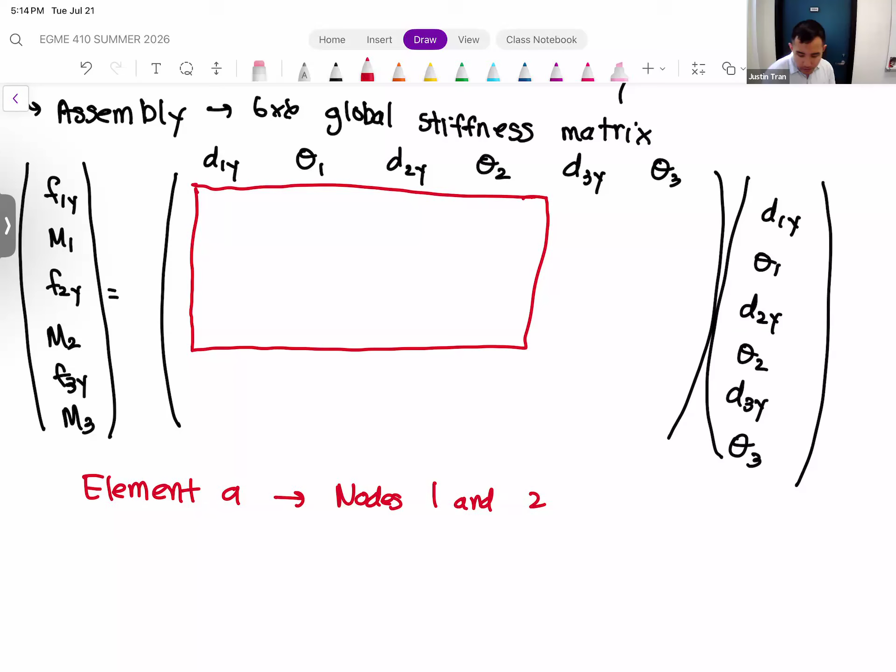I'm not going to write the values in because this is more of a theoretical problem. But unlike the previous problem we just finished, we know that every entry in our element stiffness matrix is non-zero, unless our element had a length of 0. But if it had a length of 0, we wouldn't have an element anyway. So there's no zero entry here, which means we're not going to run into the same issue as before. Our system is going to be fully constrained, so there's no fear of having an under-constrained system.

Okay, and then element B. Element B in this case is going to be connected to nodes 2 and 3, which again is fairly straightforward. Those two nodes are right next to each other in the matrix, but it's going to shift where we insert them. So those are going to be in this region. You can see that we have all rows and all columns covered here, so there's no risk of having a row of entire zeros or a column of entire zeros.

But for this problem, the assembly and the element stiffness matrices aren't that interesting because we're not fully computing them. So let's get to applying the boundary conditions, and let's illustrate how the different boundary conditions affect our matrix here.

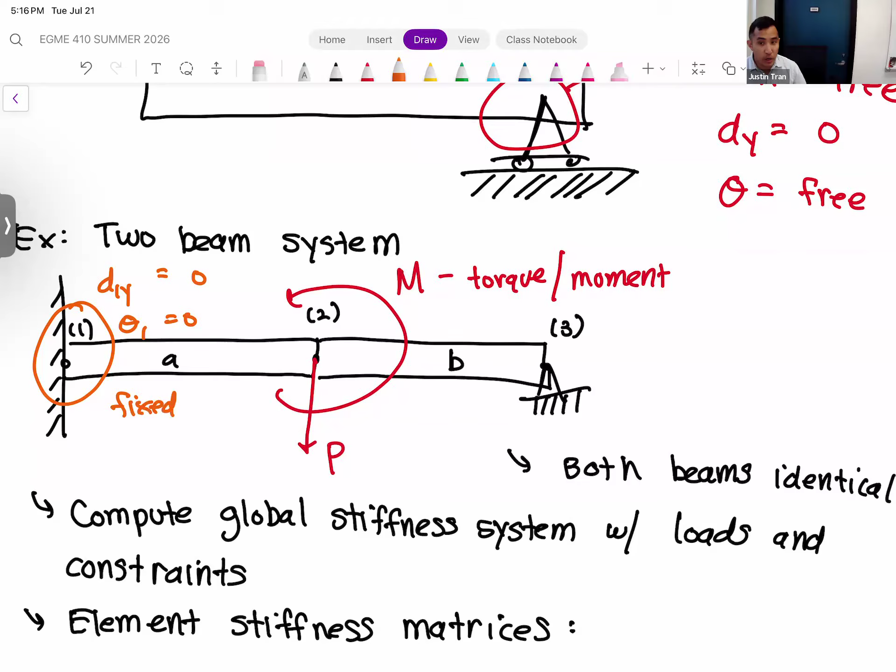First we have a fixed support on node 1. Node 1 is fully fixed, so all degrees of freedom at node 1 are going to be set to 0. That means d1y and theta 1 are both going to be 0, because we have the constraint that's fully fixed at that location. So the first two rows in this matrix, associated with d1y and theta 1, are going to be zeros except for a 1 on the main diagonal: 1,0,0,0,0,0 and 0,1,0,0,0,0. And of course, we're going to have zeros in the forcing vector as well, fully setting those degrees of freedom to 0.

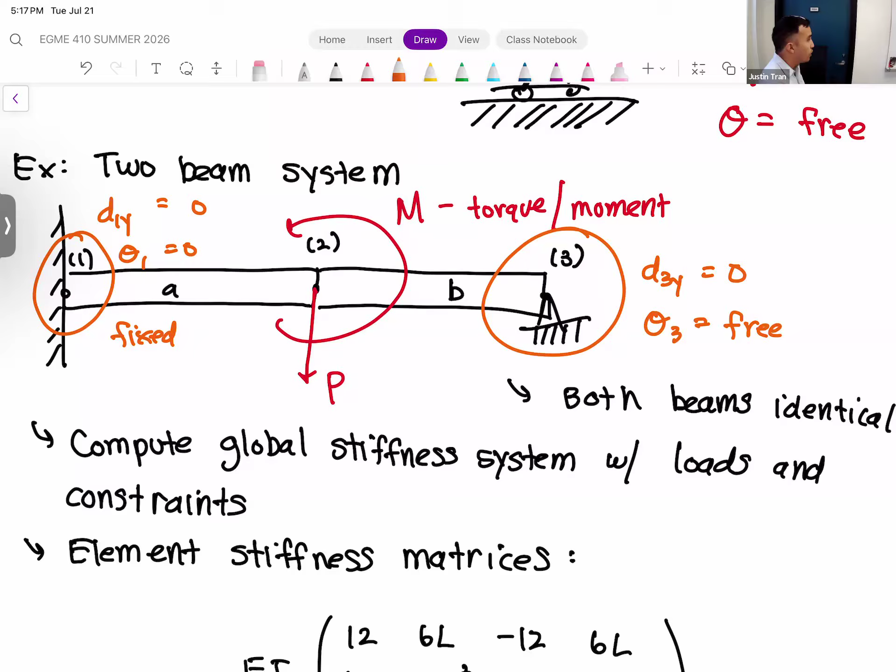Next constraint that we have is a pin support on node 3. Node 3 is not fully fixed, but we do have a pin. The relevant quantity for this problem is that d3y is going to be 0, because a pin support constrains and knocks out all the translational degrees of freedom, but theta 3 is still free. So we're not going to change the theta 3 row, but we are going to change the row associated with d3y. The d3y row is the second to last one, so let's insert zeros here with a 1 on the diagonal, and then f3y is equal to 0. So the main thing is that for a pin support, we don't constrain the rotational degree of freedom, only the translational.

Now let's go over the loads. We have two of them here - remember, it's possible to have multiple loads at the same location. We have a load of minus P applied in the minus Y direction on node 2, so F2Y here we're just going to set equal to minus P. The other load on node 2 is a torque of magnitude M.

Now for torques and moments, you do have to be careful with the sign - the sign does matter. In this particular problem, this torque M is going in the counterclockwise direction. If you trace the path around for that torque M, it's going in the opposite direction of a clock, hence it's counterclockwise. The sign convention typically used follows the right-hand rule, where a counterclockwise torque is considered to be positive.

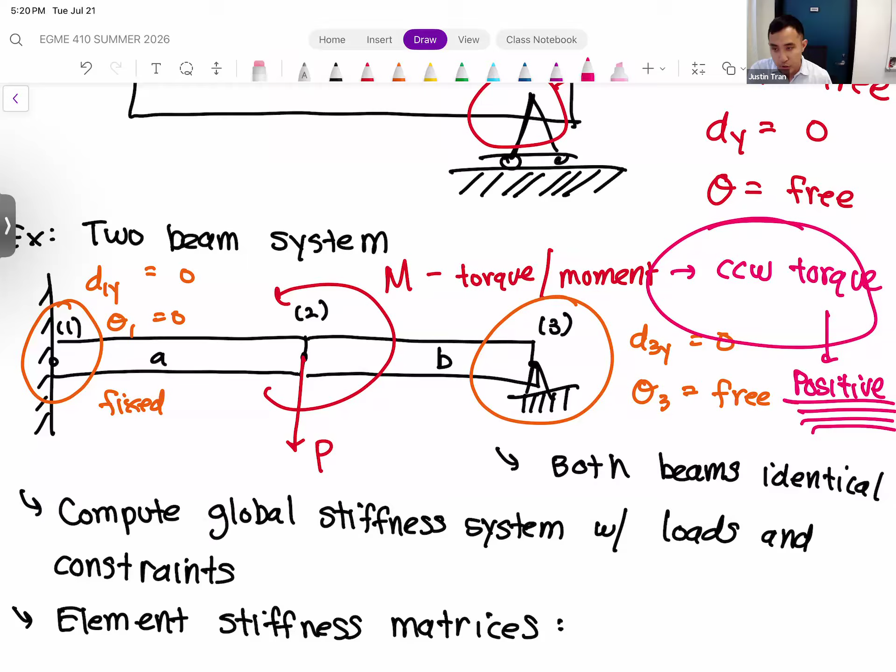But since our torque here is counterclockwise, that means we're going to input a positive M in our matrix here. If the torque was going clockwise, in the opposite direction, then we would put in a negative M.

And remember, that sign does matter. That's why we put in a negative P for F2Y, because that load is going in a negative Y direction.

But for M2, since our torque is going in the counterclockwise direction, we're going to input a positive M.

Last thing we're going to do is note that there's no load or constraint being applied on theta 3, so there's nothing affecting it. Remember what we do in those cases: we apply the stress-free boundary condition, which is just a 0, and everything else in the matrix on that row, we leave alone.

All right, so that's the procedure here. Not too much, you just have to be aware of the different types of constraints that are there. Any questions on this example?

Okay good, all right, so I have one more example for today. I'm hoping we can finish it, but if not, we can finish it up first thing next time. Not the most complex example — the nice thing about beams is we're working with relatively simplified geometries. I'm not going to give you a beam that's angled at a different angle. Every beam I give you is either perfectly horizontal or perfectly vertical, so you don't have to worry about any angularity. That does simplify things a bit.

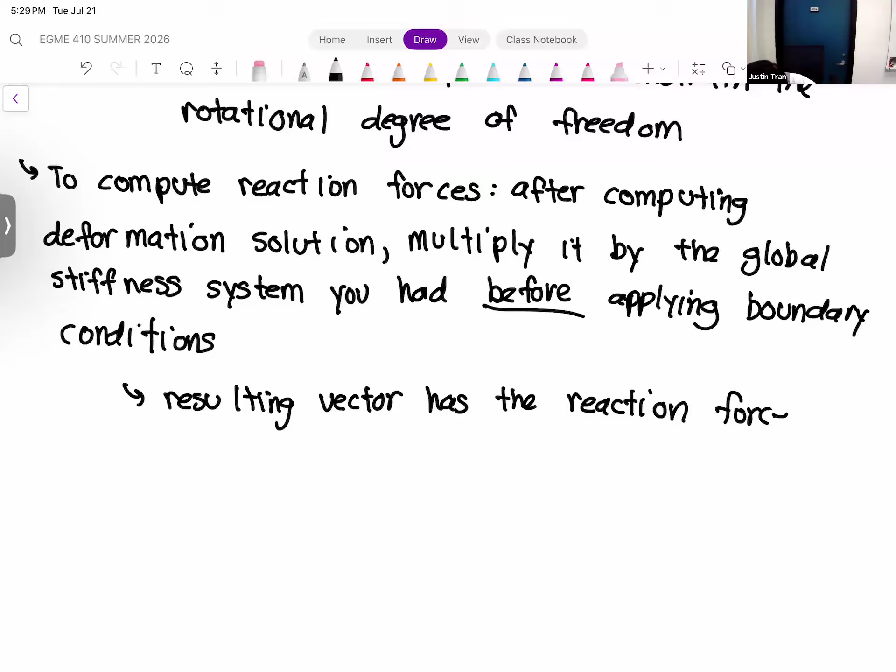Okay, so we're going to do that in the next example, which maybe we'll finish, maybe we won't. The next example is also unique, so this will help you with your homework as well. This example is actually going to combine beam elements and springs, so we're going to see how that's actually done. Any questions on this before we jump into our last example for the day?

Okay, let's go ahead and do our last example for today. So for this example, we're going to have a beam, a two-element beam that's supported by a spring.

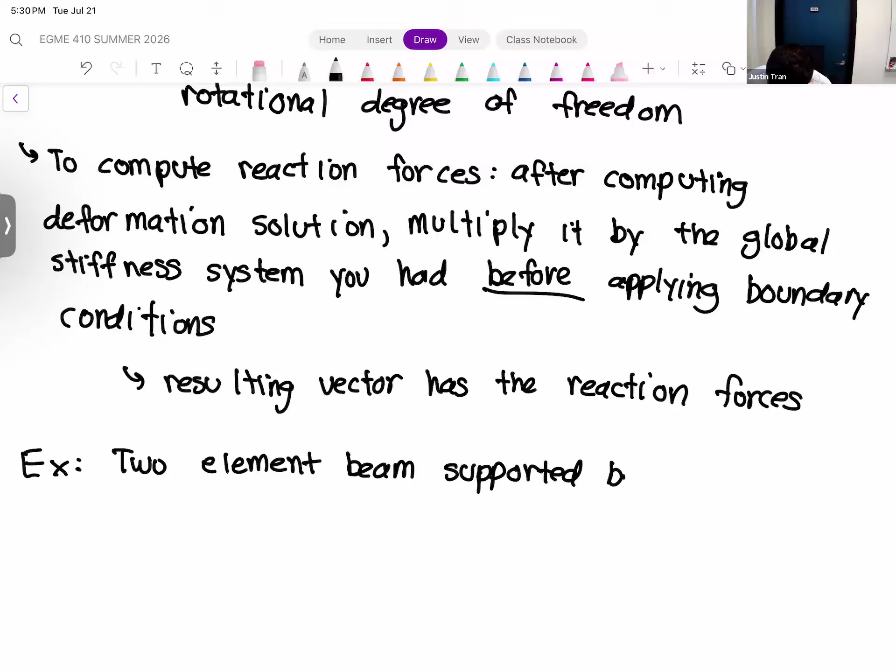So we're going to have a beam. It's going to be fully fixed to a wall, so we have a fully fixed support here on the left-hand side. One beam like that, another beam like that. And the right end of the beam is going to be supported by a spring, which we're going to treat as a spring element.

Okay, so the first beam that's attached to the wall, we'll call that element A. Second beam that's right next to it, we'll call it element B. The spring we will define as element C.

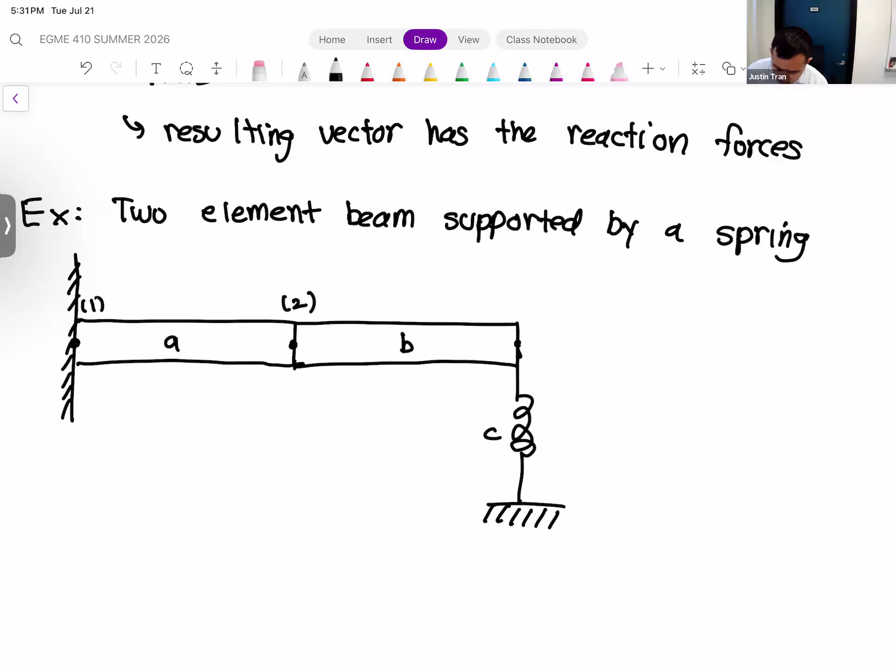Let's write in the nodes. So the node that's fixed to the wall, we'll call that node 1. The node that's in between elements A and B, we'll call that node 2. The node that's at the very end of the beam, we'll call that node 3. And then the node of the spring that's attached to the ground, we'll call that node 4.

Okay, so let's talk about the beam properties. We're going to assume that both beams are identical, so they have a Young's modulus of 210 gigapascal, a length of 3 meters, and a moment of inertia of 2 times 10 to the minus 4 meters to the 4. So moment of inertia has a weird unit, it's actually length to the fourth, and we need that to balance out all the units in the system.

All right, and so the properties of our one spring. The spring only has one property, which is its spring constant, and that's 200 for this problem, 200 kilonewtons per meter.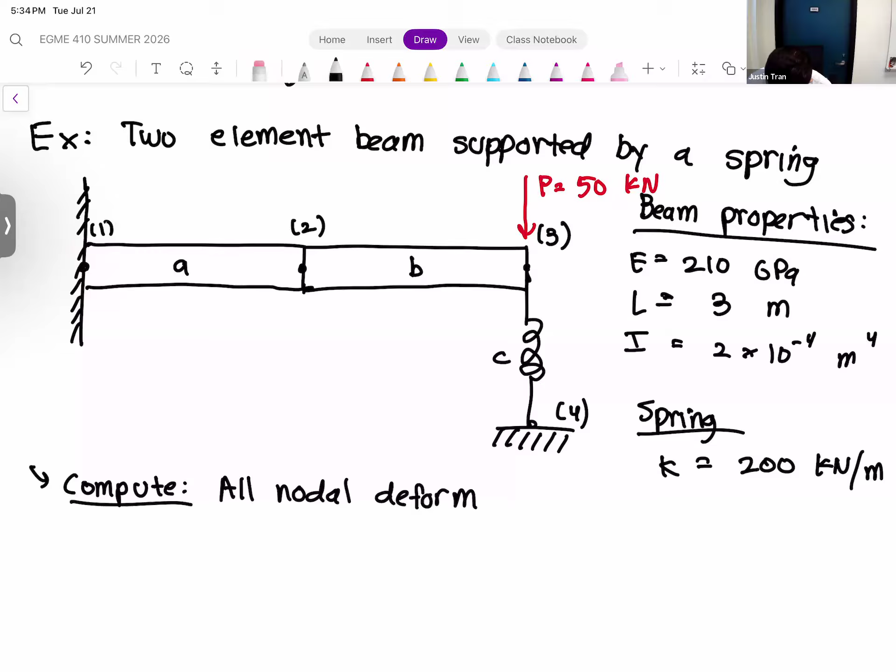All right, and so I believe that's everything that you need for the problem. And so from here, we're going to compute, for this problem, let's compute all the nodal deformations and rotations. In other words, we're just going to solve the problem like we usually do, so we're going to apply our direct stiffness method. The other thing we're going to compute is all of the reaction forces as well.

All right, and so after we compute all the deformations in the problem, we're just going to multiply that by our global stiffness matrix that we did before boundary conditions, and that will give us our reaction forces. Any questions on the setup for the problem?

Okay, all right, so let's go ahead and get started. First thing is we need to compute all the deformations in the problem, so we are just going to go through our direct stiffness methodology. Something you're probably sick of at this point, but like I said, all these problems proceed the same way. The only difference is just the details in the element stiffness matrix. So let's do that first, we'll start with the element stiffness matrices.

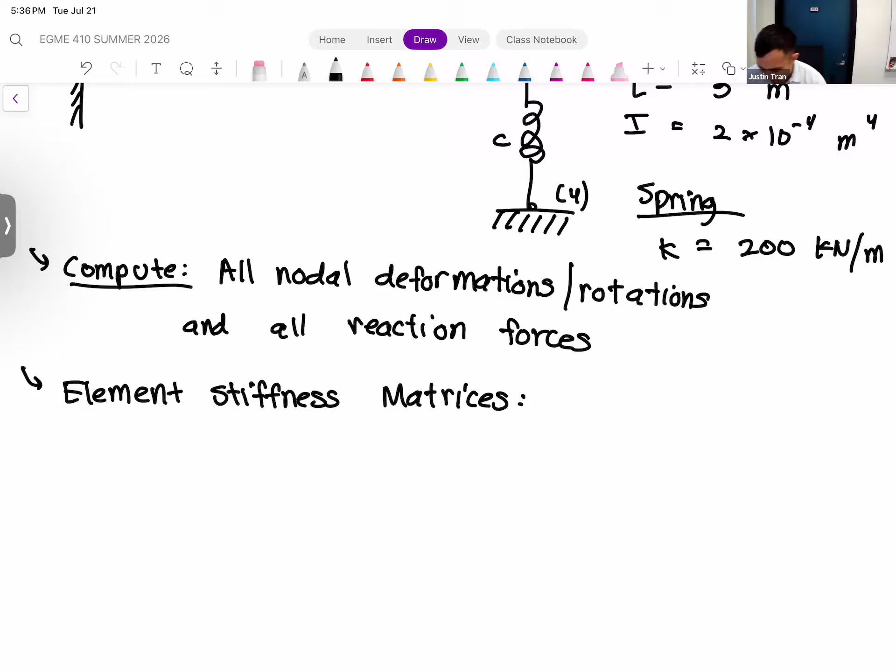Okay, so first we have element A. Element A is a beam element, that was given to us in the problem. And we know its Young's modulus, we know its length, and we know its moment of inertia.

So its element stiffness matrix is EI divided by L cubed, times the matrix: 12, 6L, -12, 6L; 6L, 4L squared, -6L, 2L squared; then the last two rows we have 12, -6L, and at bottom right we have 4L squared.

Element A is connected to nodes 1 and 2, so that's going to give us our degrees of freedom: D1Y, theta 1, D2Y, theta 2. I know for this problem we have the numbers, but we're going to leave it off for now. The reason I'm leaving it off, you'll see in a second once we do the assembly. It's a little bit easier to see the assembly for both the beam and the spring if we do it together, or in terms of symbols first.

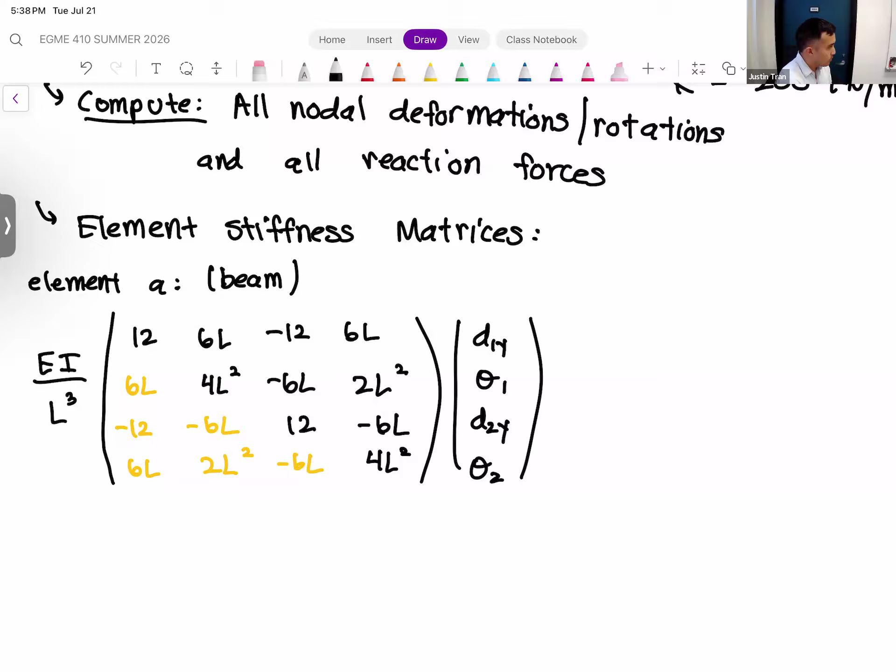So for element B, it's going to be exactly the same. The values for element B are the same. The only difference is that it's connected to nodes 2 and 3 as opposed to 1 and 2. Element B also is a beam, so it's EI over L cubed, and we're going to write the exact same thing.

By the way, I'm using a different coloring here just to denote the entries that are symmetric. You don't have to use different colors, I'm just doing it to highlight the symmetry. Feel free to just use the same color for all of them, that's perfectly fine.

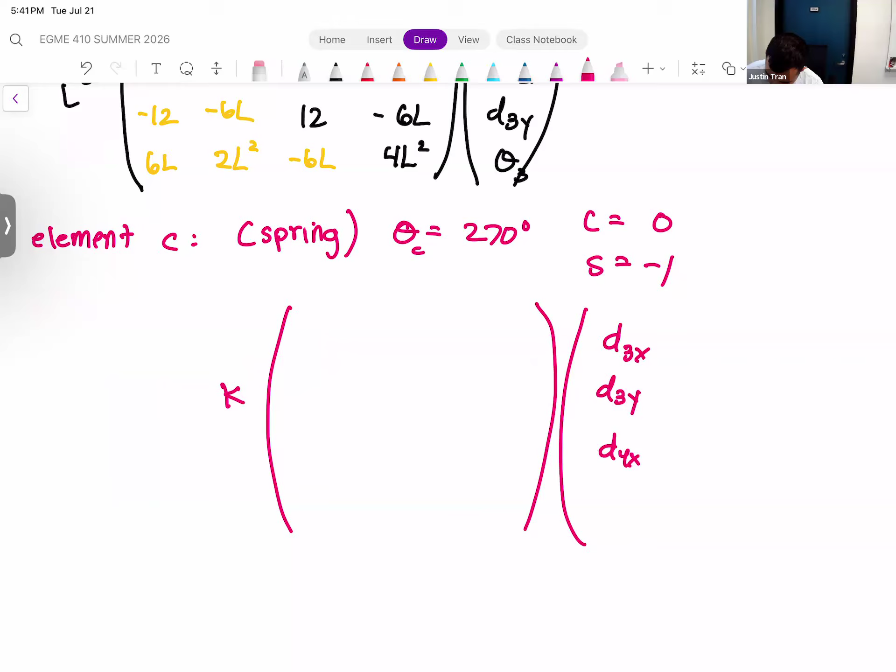And so we fill this in with the combinations of cosines and sines that we had before, and treat this kind of like just a pure 2D problem. So that's one way we can do it, and this is not wrong, by the way. You can definitely do it this way, but it's a little bit cumbersome.

Because if we just make an observation here, let's come back to the figure. Let me go ahead and erase all this pink stuff here. All right, so let's make an observation.

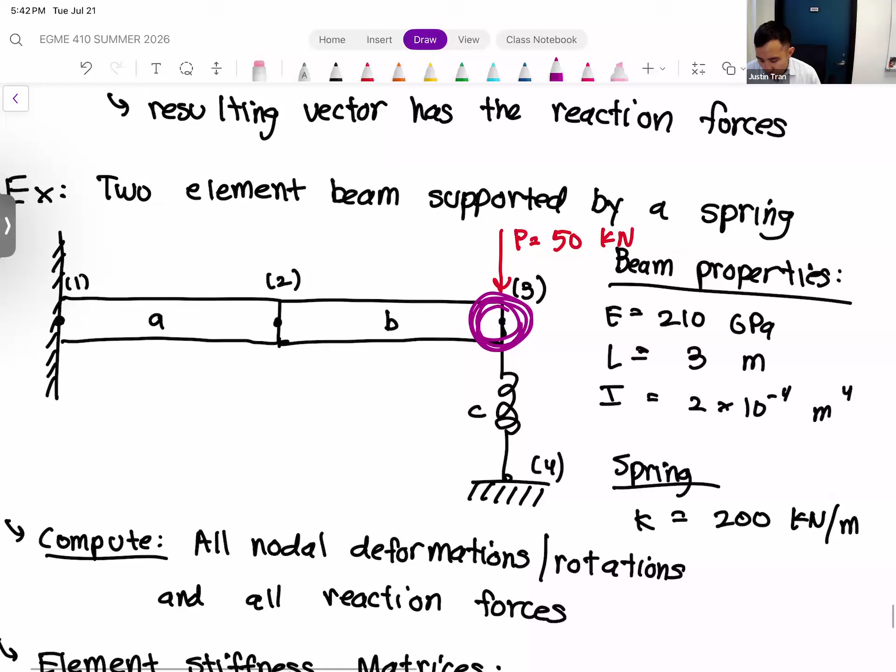We know if we look at node 3 right here, let's focus on that one. Node 3 is attached to two elements: it's attached to beam B, and it's attached to spring C. Now that's significant because we know the types of deformations that these types of elements can support. Beams, we know, can only support transverse deformation and rotation.

It cannot, right? So at least in the simplified beams that we're considering, beams cannot support axial deformation at all. Whereas springs, spring can only support axial deformation, which in this case, for a spring that's vertical, an axial deformation is a deformation only in the y direction.

Now, the reason I'm bringing that up is that if you look at the deformation modes supported by these two elements, neither element can support any deformation in the x direction. So if you look at that beam, the beam cannot support axial deformation. So the axial direction for that beam is the x direction. So there's no way that beam can support x deformation.

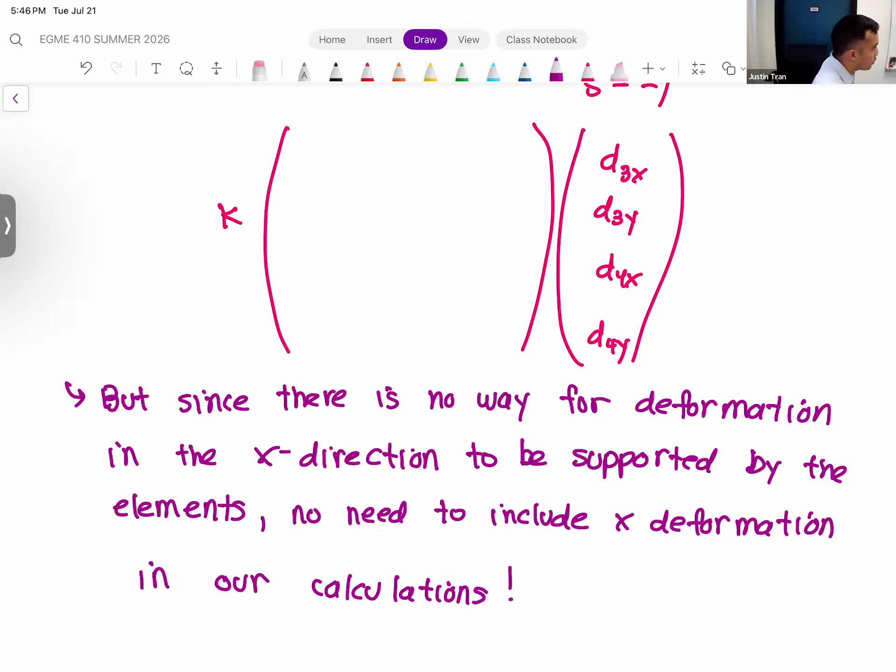Even though technically for a 2D spring we would technically have to include that x direction, just because that's how a 2D spring is, if you actually plug in these sines and cosine values—this is one, for a vertical element, vertical elements are actually very easy to do—the results actually support that conclusion as well.

So you actually computed the element stiffness matrix. You went through and multiplied all the sines and cosines and zeros and ones, and you get this. And if you look, the entire first row, the entire first column, the entire third row, the entire third column are all zeros.

So what does that tell us? That tells us that there's nothing constraining, or there's no stiffness in that direction. And so if we were to include D3x and D4x in our analysis and in our assembly, we'd end up having to manually constrain it anyway, because we get something that's under constraint.

So to save yourself a little bit of time, if you notice these things, and you know for sure that there's no way that D3x, D4x are going to be non-zero in any way, you don't have to include it in the element stiffness matrix. And so the easier way to do element C is to kind of make note of that.

We can make note of that and basically treat it as if it were a 1D problem, only in that Y direction. And so our element stiffness matrix for C can be just simply this 2x2 matrix, the good old 2x2 spring element stiffness matrix of K minus K minus K K, multiplied by the deformation vector, D3Y, D4Y.